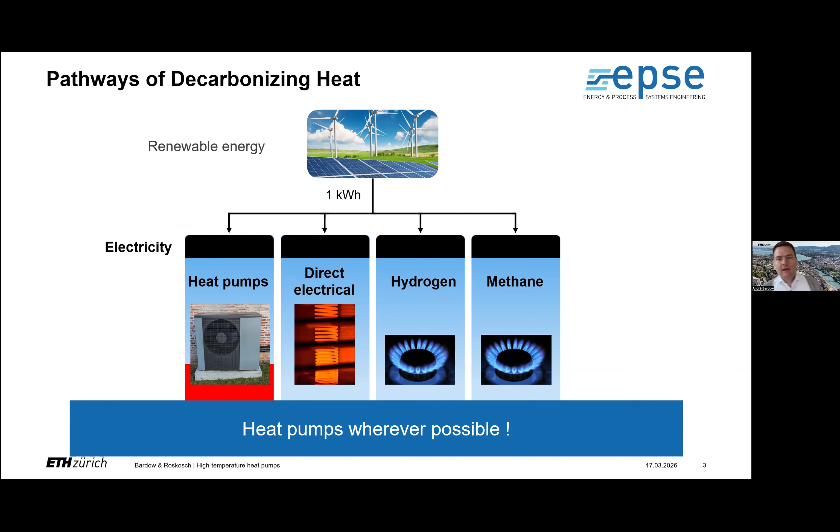And that's why we're pushing the boundaries. How are we standing with decarbonizing heating by heat pumps? For this, I looked at Swiss data, basically what's the energy demand in residential and industrial systems.

What you see at home, at least for Switzerland, which is cold today, a lot of our energy use is for heating - warm water, the shower you had this morning, and your heating system.

But also industry - actually the majority of energy for industry is used for heating. The catch is, so we know what to do to decarbonize this: prioritize heat pumps. If you look at homes, it's kind of awesome that in Switzerland and many other countries by now, heat pumps are the most sold heating source for private households. The market is established. There's still challenges out there, but it's kind of the go-to technology by now, which is awesome.

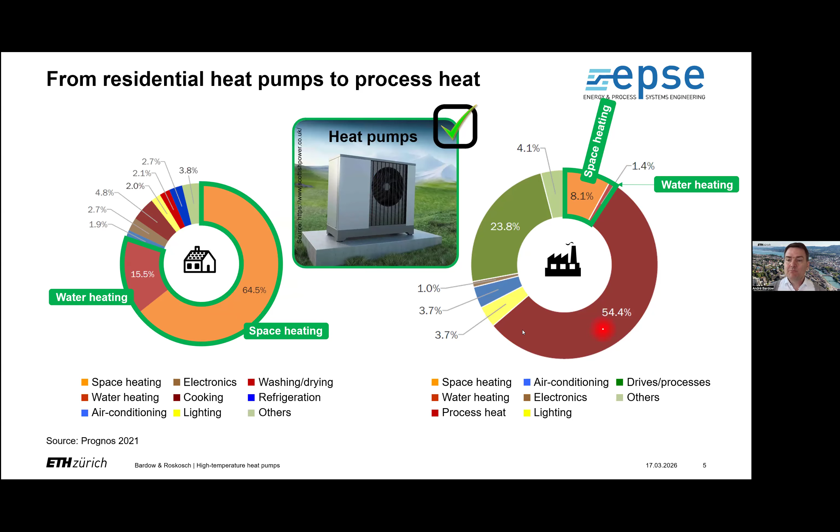The story is very, very different in industry. In industry, yes, we also have some space heating demand which we could supply by heat pumps, but most of what we are seeing is actually process heat - that means high temperature heat. And if you look at what we're doing today, it's basically 100% fossil-based, I would say. So the challenge I will be addressing in this talk is: how can we generate heat pumps that provide heat at higher temperatures to supply industries?

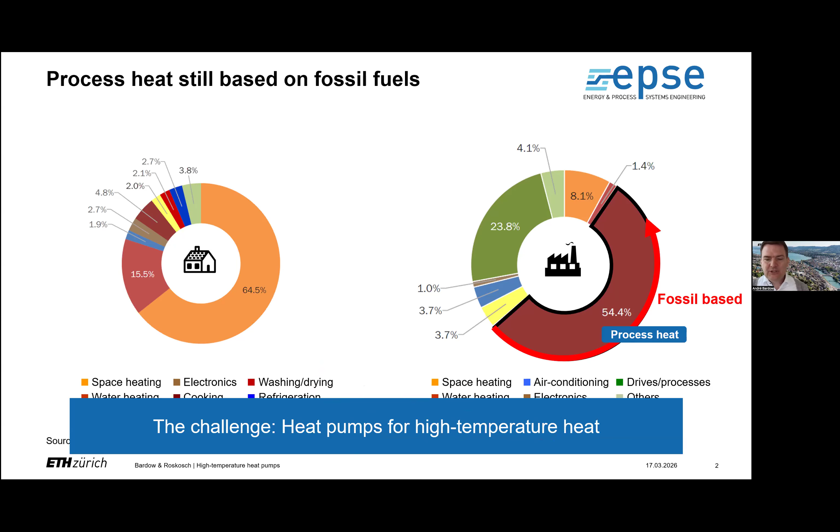Okay, so why is it so much more difficult? Why are we lacking heat pumps for industry? And for this, and because this is a webinar on thermodynamics, I have to show at least a stylized thermodynamic diagram where I plot temperature over enthalpy, like a simple diagram for heat for pinch analysis.

In residential systems, we have the advantage that all of us are individuals, but actually at home we are rather similar. We like our homes to be at 22 degrees, maybe somebody likes 25, but the heat demand is roughly at the same temperatures. And also the heat source - okay, maybe it differs by country - but when it's cold, not so much. So we have basically one fixed use case all across humankind.

So what we need is one type of heat pump that basically takes environmental heat, the heat source, and pumps it up to the heat demand. And for this, we have been very efficient at designing such cycles. For the non-thermodynamic experts - I think most of you should know - this is the vapor dome, the two-phase region, and we can design the cycle where we have compression, heating, and expansion, and the heat uptake in here. So we really optimize these systems.

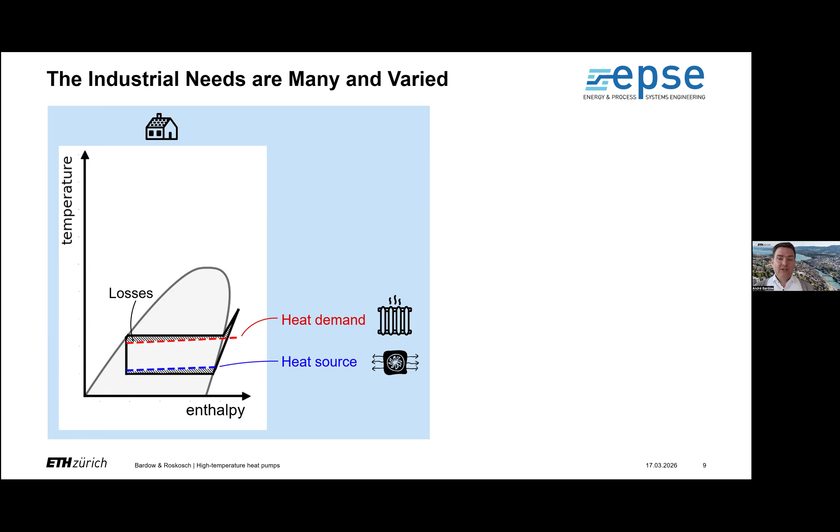That's awesome. Now, if you take a look at industry, the story changes completely. Why? Because the heat demands can be all over the place - they can be at very different temperature settings. You might want to boil some water at 100 degrees. Another company wants to heat up a gas to 200 centigrade. So it's very different temperature levels.

Also, what is going on is very different. You might want to generate steam at a certain temperature where the temperature doesn't change, or you take a cold gas and heat it up to feed it into your reactor. So it's both the temperature level and the temperature glides, as we call them - the temperature ranges are very, very different.

The same holds for the heat sources, where at home we are usually tied to the air, or maybe we drill into the ground, but it's environmental heat. Christoph was mentioning BASF is using some waste heat - they have it at 60 centigrade. Oh, maybe your company has something at 80. So we have very different use cases, both on the sink side and on the source side. And that is a challenge.

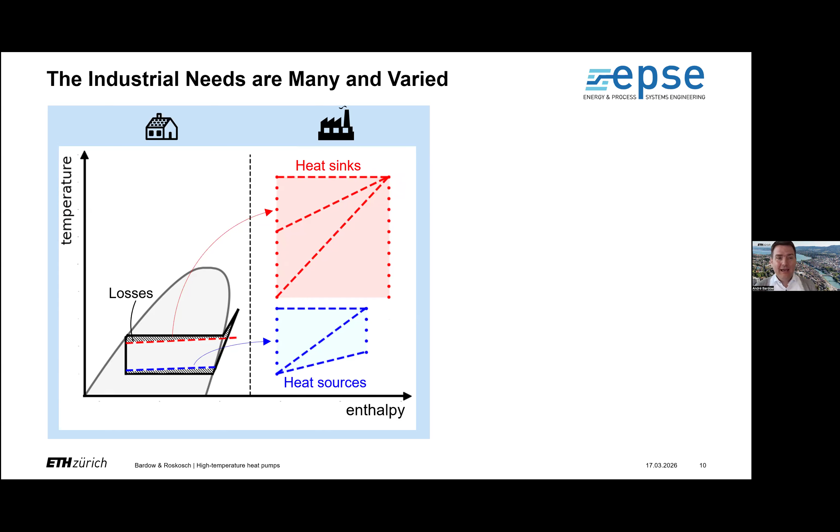How did we approach it by now? We design specialist heat pumps for every single application. So you will find heat pumps out there, but basically if you look at them carefully, you will figure that somebody had a use case where they needed steam at that temperature and had waste heat at that temperature, and so a heat pump was designed, and now somebody tries to sell it. So we have specialist heat pumps and also specialist refrigerants, that is the working fluids. And because of this, these are not mass product systems, but they are custom designed systems.

And that makes them very expensive. Or you misuse them because they were designed for a different case, you lose the efficiency, which is basically the losses are how tightly your cycle is connected to the heat source and sink.

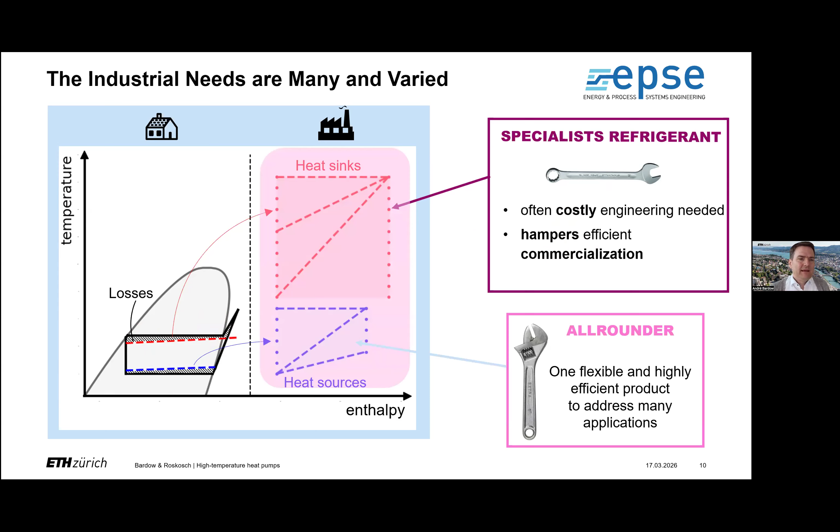So what we have been looking for in our group is to say, can we not find a heat pump that simultaneously covers all of these applications? Why would that be nice? Because then we can have one design and scale it out to all industry applications, generating economies of scale, at least of numbering up. And the key is to find the right refrigerant.

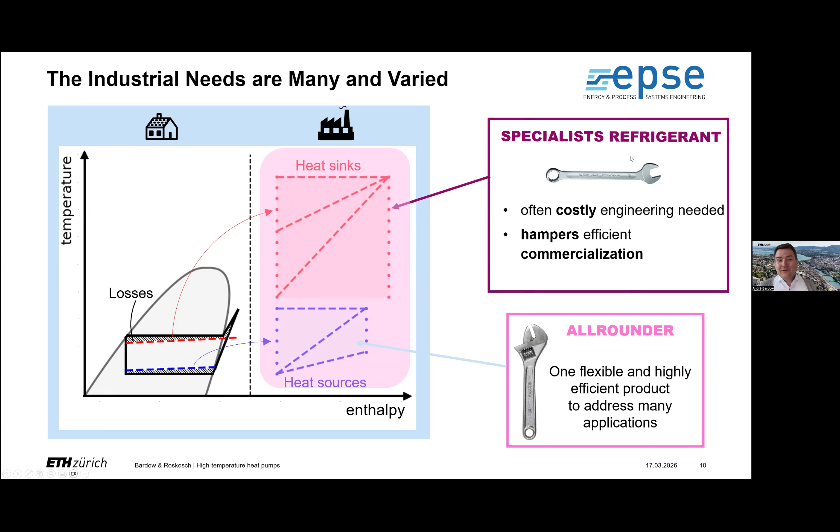And the refrigerant we are proposing is not a single refrigerant, but a refrigerant mixture. So instead of using a refrigerant A, you use a mixture of two components, A and B. The idea is we define a mixture A and B, and just by changing the composition, I can keep the same seals and materials in my company, but sell different mixtures to different people. I can customize the refrigerant and the heat pump, but still generate efficiencies.

So we started with this idea. We started a project saying, if we could exploit this flexibility in temperature level and in glide, what can we do? We can really make sure that we can tailor a heat pump to a specific industrial application.

But basically what will happen is that customer A will get a 10-90 mixture and customer B will get a 70-30 mixture. But still, because we limit to two molecules we need to deal with, we have one product platform, so that we can benefit from reductions in capital cost, and mass customize a slightly tweaked system.

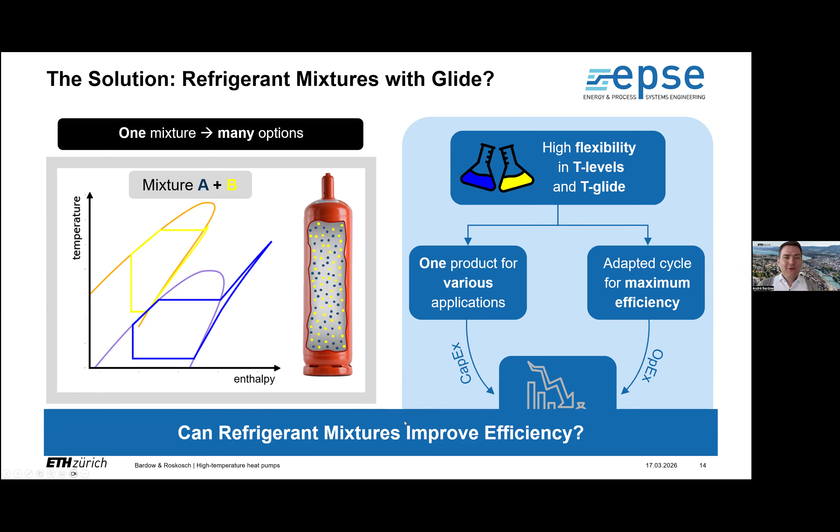The question is, does such a system exist? Because this is a nice animation, but do these refrigerant mixtures exist? For this, you need to know thermodynamics, because we don't want to try this out experimentally. I just want to highlight what Christoph was also referring to earlier. And if you are scared about thermodynamics, which has been traumatizing for many people, trust me, it's awesome, and it just got much better and more convenient to use.

And in particular, we've been benefiting a lot from AI, and this is a slide on what we've recently been doing. We've been employing machine learning, but I think the catch, like with thermodynamics, is that we really need to instruct the machine learning algorithms. We cannot use them blindly, but we need to instruct them to speak really the language of thermodynamics by implementing thermodynamic constraints. There are also some developments out there.

I just want to highlight one thing we did in our group. We have a version of PC-SAFT, which is an equation of state, and we have an SPT model based on structure - it's like GPT, ChatGPT. We can enter any molecule as text, as SMILES, and we can predict things like vapor pressure and mixture properties. And this works amazingly well.

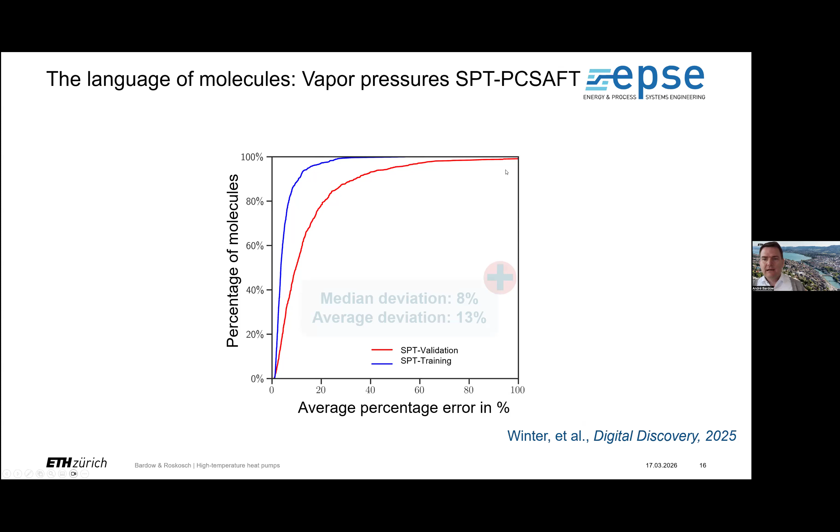So what you see is a large database of vapor pressures we predicted. This is a cumulative error curve. The blue line is basically if you fit PC-SAFT. The red line is what our predictions are - real predictions. We have errors around 10%, which might sound like a lot, but for some simple molecules, we are perfect. This is an average deviation, comparable to experimental deviations. Even for very complex structures, I think we get reasonable predictions with these tools.

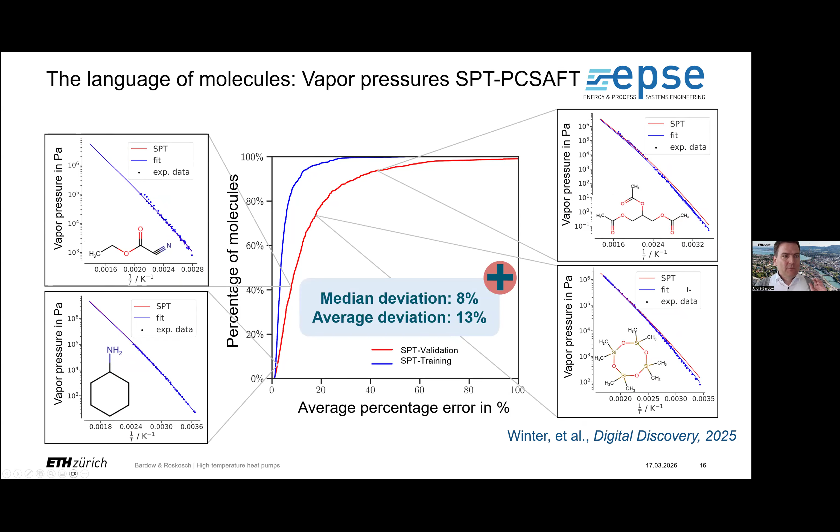So please overcome your trauma from your study time and really look at these amazing tools that are out in thermodynamics. A lot of people in the heat pump world believe RefProp is thermodynamics. Trust me, there's more to thermodynamics, and in particular if you want to go into the world of mixtures and so forth, you have to use these advanced methods.

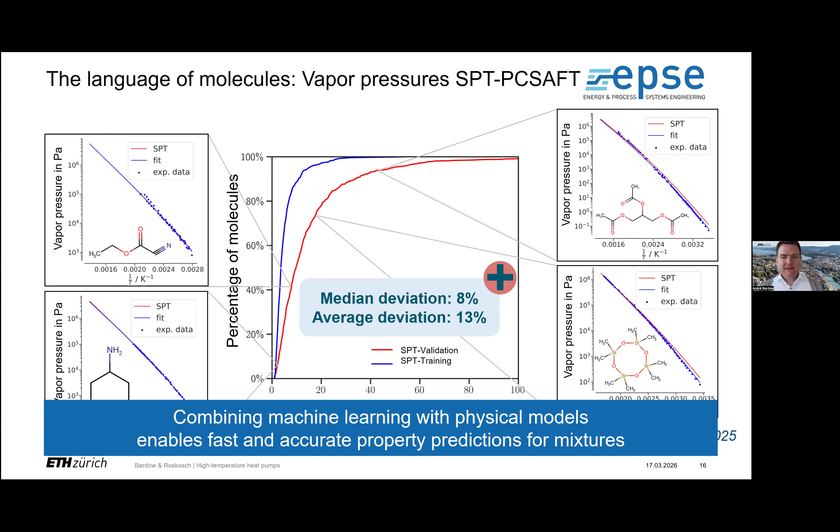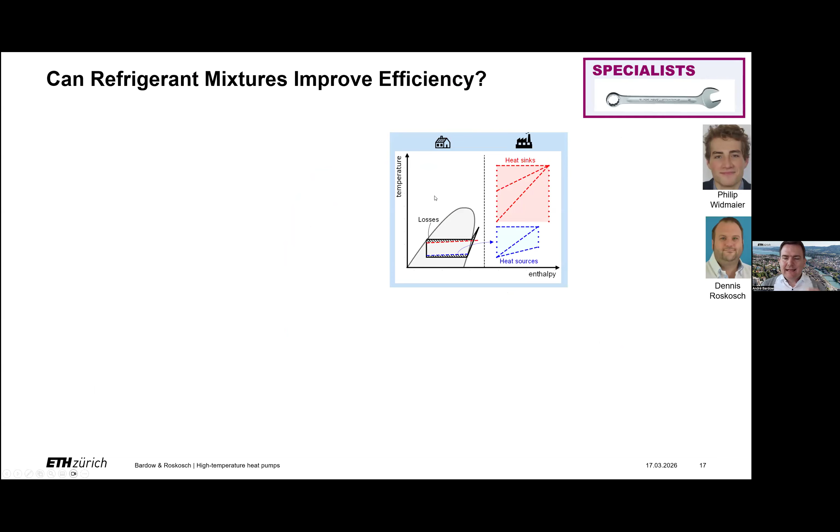So we use these kinds of tools in our group to answer the question: is it really a good idea to use these mixtures with a temperature glide? And this is what Philip Widmaier did. So what he basically analyzed is whether there's an advantage to using mixtures. And this is a complicated graph.

Basically what he varied is shown on the axes: he changed the glide, the temperature change we want at our heat sink—is it none or is it high? And on the x-axis you see the same thing for the heat source: do we have a constant heat source, or is there also a glide? And what we've plotted is the COP, the coefficient of performance.

Again, how much heat do I get per electricity put in, and we compare what the gain is for a mixture. What you see is this light color—anything green and yellow—means mixtures are better. Meaning if you have an application with this temperature change at the heat source and sink, you should use a mixture. The advantage can be 26%, which for industrial applications is a lot.

So what we see is this idea—which industry has been avoiding, using mixtures with a glide—would really benefit us, giving almost up to 25% efficiency gains. But okay, these are specialist mixtures. So for each point on this grid, we design the optimal mixture using thermodynamics.

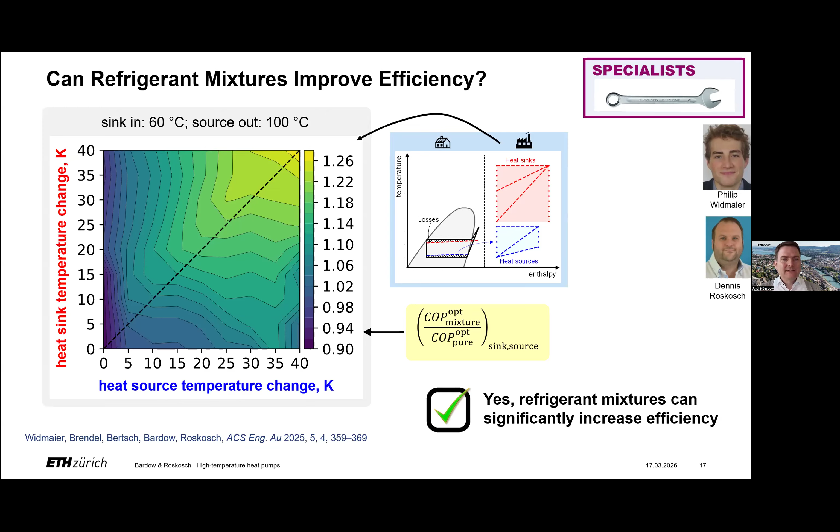Then the next question was: do these all-rounders exist, which we have been proposing? So basically, is there one mixture which I just need to tweak and it works in every single situation? And the news is, they do exist.

So the conclusion is that this concept we thought would be nice does exist. Yes, and in fact there are plenty of mixtures which could provide this flexible design platform for heat pumps while still retaining very, very high efficiencies.

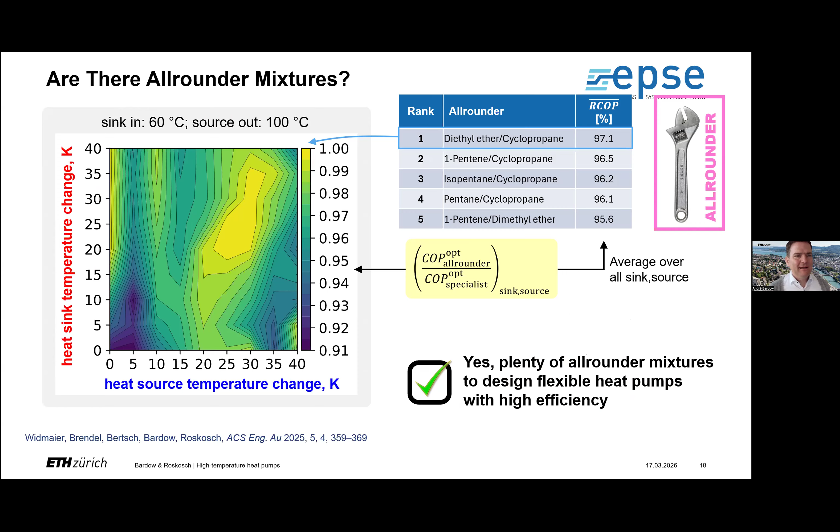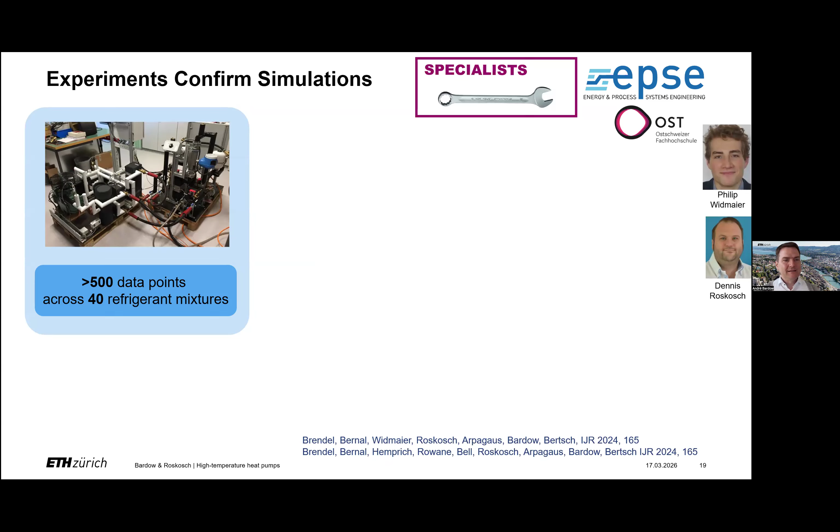Actually, I have to say the companies who provided, in particular, the compressor were scared, so we needed to sign that we waive any liability. But it worked like a charm. Now I can tell you the company is Bitzer, because they are super proud that there were no problems in the operations, and super proud because our colleagues generated a lot of data.

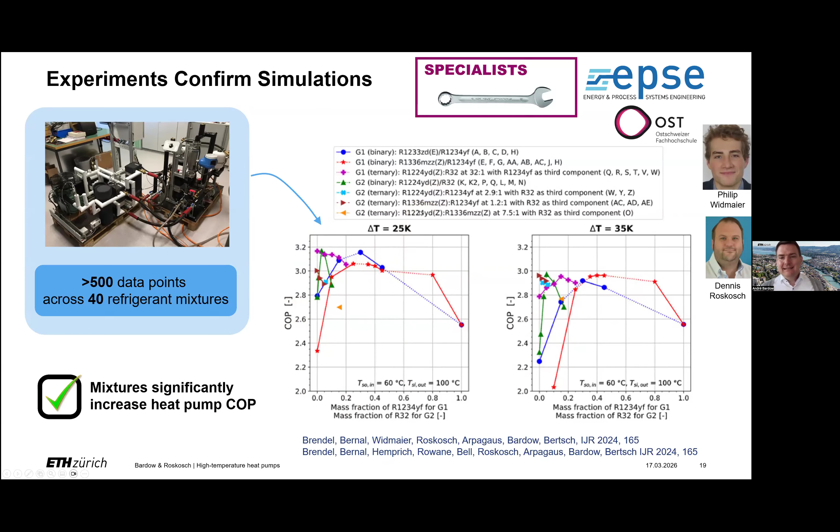So we confirmed the first finding: these specialists exist. And then what we found exciting was to analyze the data to see whether these all-rounders exist too. This is a similar plot, but be careful, it's COP again, now plotted against the 3 different combinations of heat sink and source temperatures we had. I know it's a little messy, but I'll just go through it.

This is basically the same mixture. By changing the composition of this mixture, we find the best performance. Obviously, we did not test all the molecules we could check in the computer, but this concept really seems to be working, that by tuning a 2-component refrigerant platform to your specific application, you can really get this benefit of COPs.

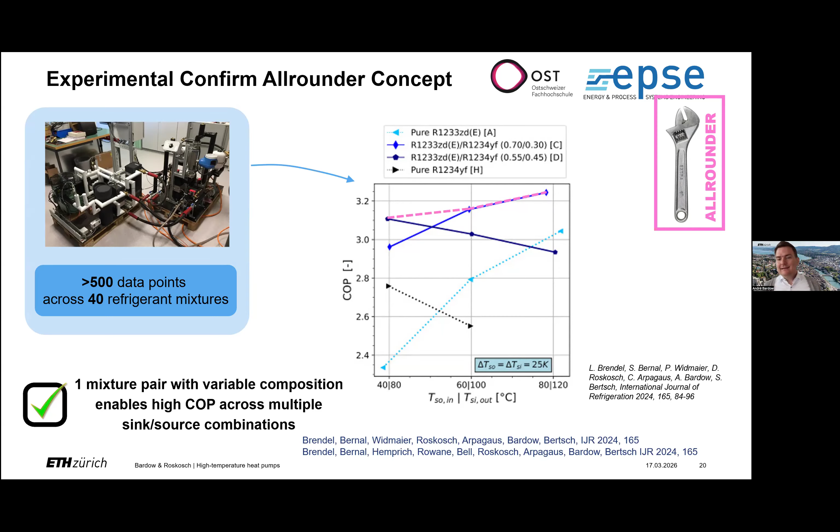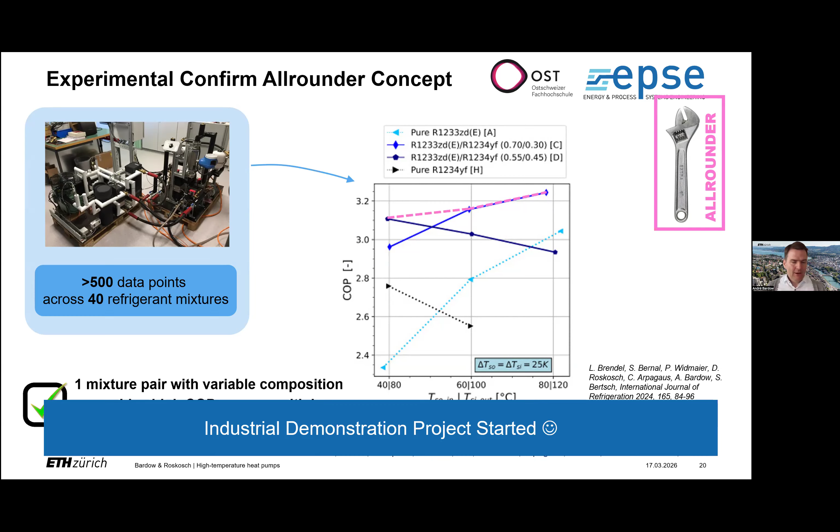And what I'm really excited about, I cannot fully disclose, is that this will now be industrially demonstrated. I'm not allowed to say the name of the company, but I love Switzerland, because we now have a company everybody of you knows that will build such a heat pump in their operation because they see the benefits of this and they've understood the heat pumps. Okay, now this is awesome. I'm very excited, as you might figure by now.

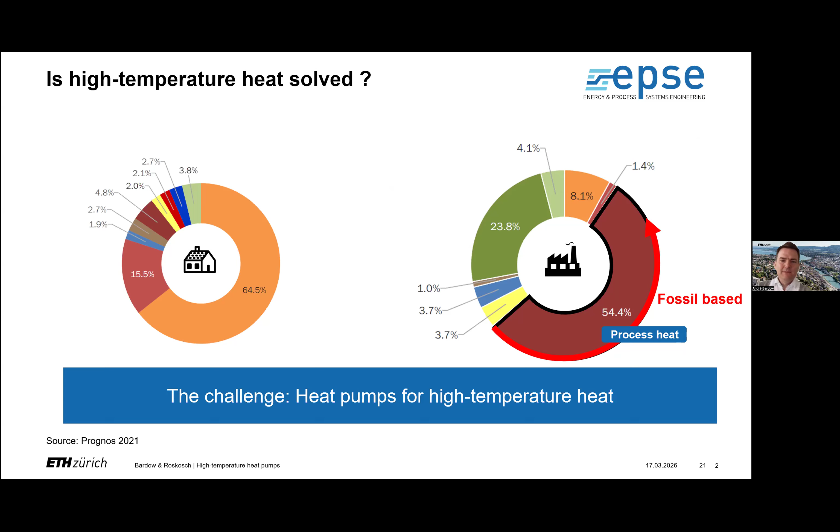So did I just solve high temperature heat pumps? Yeah, and for this, I need to be honest with you that I tricked you a little bit with our graphics. What do I mean by this? I plotted this big space of heat pump applications and showed you that in most of the space, we are green or yellow, meaning the mixture heat pumps are awesome. But there are some blue regions where they are not that awesome.

And let's look at cases where they are not that awesome. This is the cases where we don't have a temperature glide in heat source and heat sinks. And if you think about this, what kind of applications are we talking? One application is generating steam. If I generate steam at 200 centigrade, it's boiling water to steam, the temperature does not change. So while this space looks maybe small, I have to be honest with you, actually, half of the industrial applications are this class of applications.

So what I showed you till now is awesome if you have glides where the temperature is changing, but for steam, actually, this is not the solution. So we have to look for, and I think it's really important to separate these 2 cases, another class of solutions. And for this aspect of steam generating heat pumps, I want to emphasize another point which is important.

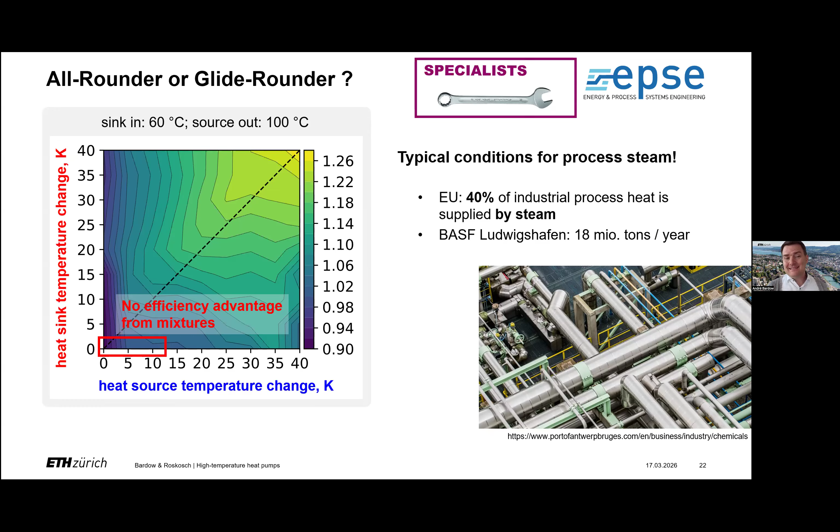Because it's not enough to design a heat pump, in particular in industry, because actually a company like BASF buys a heat pump, but it has a lot of boilers. It has a waste stream. You really have to have a heat pump that needs to fit into the energy system. And it's actually more complex than a usual boiler, because with a boiler, I just take my fossil fuel and burn it. But with a heat pump, I need to make sure that the waste heat is available and the temperature levels are well aligned, because I'm not burning something to 2000 centigrade, but every Kelvin matters.

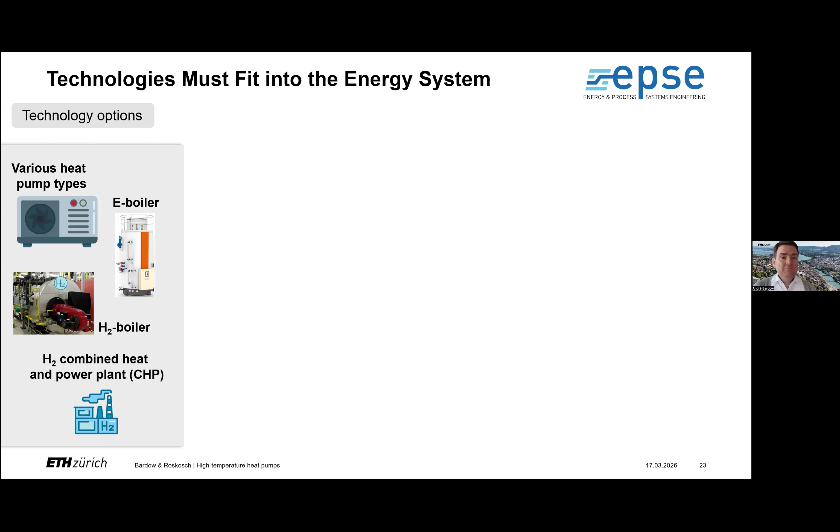So it's really about whether the heat pump fits into your overall energy system. A standalone analysis of your heat pump is insufficient. So what we did in order to analyze the role of heat pumps and which heat pumps we need to generate steam, we looked at a whole chemical site. And this has been published.

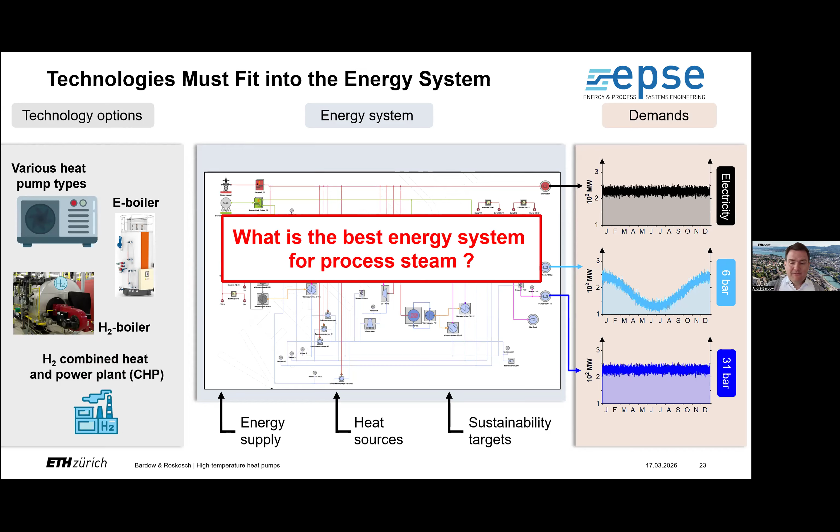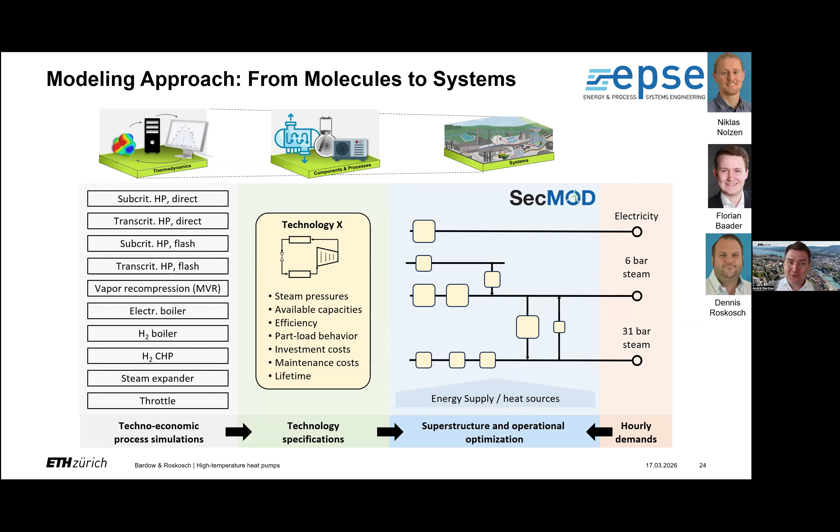We did a very detailed analysis. I cannot show all the details, but we developed a model. We analyzed many scenarios and very different conditions, but I will just share the base result finding, because they actually turn out to be very stable. I'm happy to discuss with you. So we analyzed the system: what's the optimal net zero greenhouse gas emission supply system? And it looks like this.

I apologize, it's a little bit complicated, but if you look at the left-hand side, you see heat pumps, but there's also a lot of other stuff: electric boilers, even hydrogen boilers. And if you look at the nominal design, the capacities we are designing, basically we cover like half of the capacity with heat pumps and the rest is covered with something else, okay?

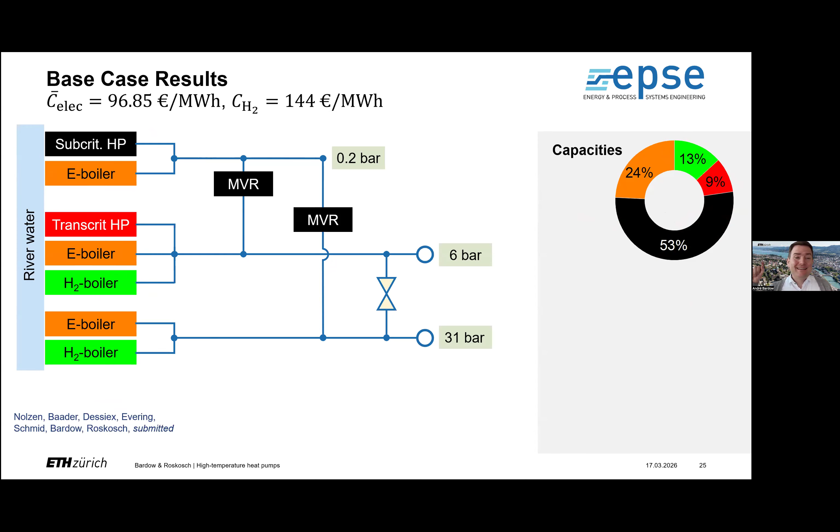So I don't want to oversize my heat pump, the same as you do at your home. You have a storage or maybe an electric heater to cover this one really crazy cold day per year, and then you just heat by electricity. The same thing is happening here. This one crazy day, I will not oversize my heat pumps. So heat pumps again, it holds even on the systems level, what I told you: heat pumps have the priority, even looking at it economically.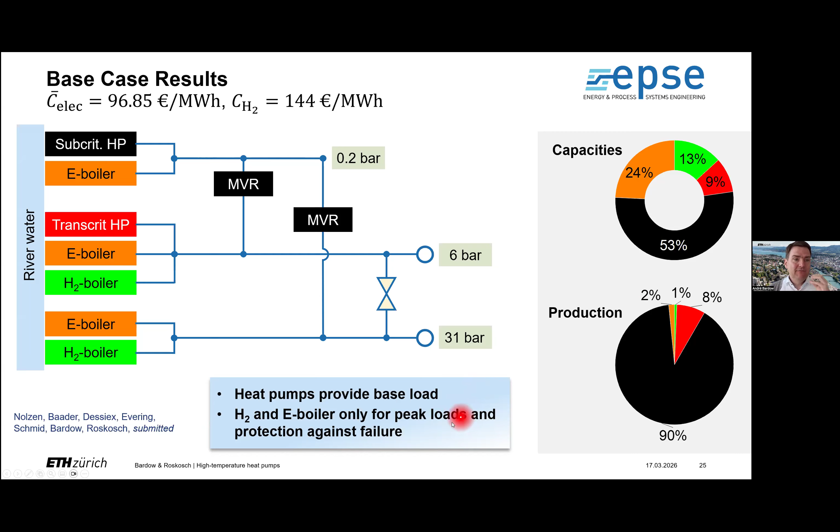And what kind of heat pumps are these? Now I take a zoom into the technology, because this is the heat pump we find, and it's a little bit complicated. So what we find is actually a low temperature heat pump. So to produce high temperature steam, we use a low temperature heat pump. We generate low temperature steam and then do vapor recompression. So the conclusion is, and this finding is quite robust, that the best high temperature heat pump for steam generation turns out to be a low temperature heat pump. And still this is important, because the heat pump does most of the lifting, since you evaporate the water, which is a lot of the energy input.

But why do we prefer a low temperature heat pump? Because we find much more efficient refrigerants, and we can operate the heat pump really at its sweet spot, so maximum COP. And then we do basically this uplifting with the compression, and we solve two problems. At these high temperatures, we find very few refrigerants which would even just work. And what is nice, this technology could be feasible today.

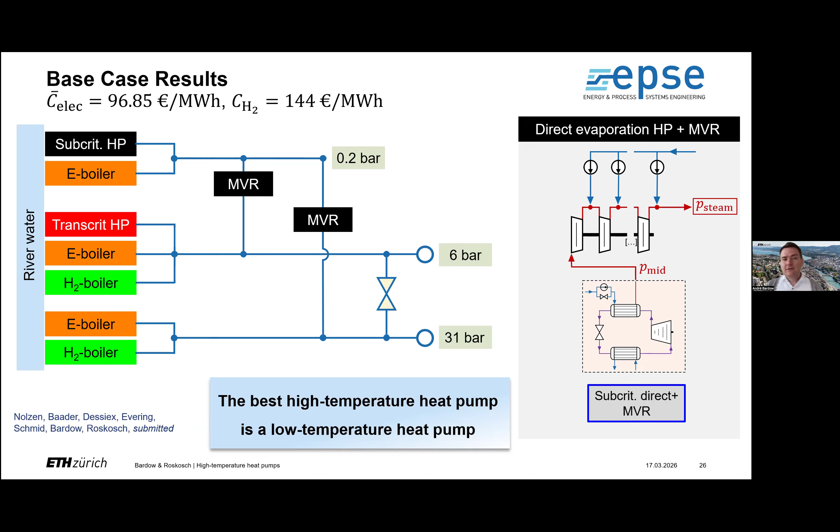Okay, so with this I hope I covered the whole space, and I just want to conclude. I hope I could show you that this idea to use mixtures with a temperature glide is really a promising concept to supply applications where we do have temperature glides, whereas for steam, and also high temperature steam, it's actually best supplied by low temperature heat pumps plus vapor recompression. And I just have to emphasize, money makes the world go round, but if you take a step back, you will find that thermodynamics is really the guiding star that takes us to such analysis. With this, I thank you for your attention, and I'm happy to answer any questions.

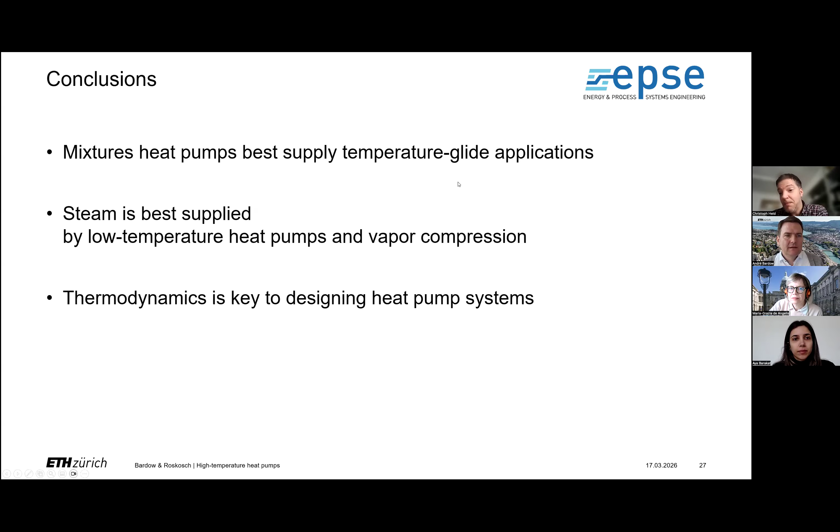The first is, the heat pumps that are implemented in industry, are they meeting ATEX standard? Oh yeah, it's for industry actually, we put... industry is much easier, I think, than at home. That's basically the application. Actually we put this in our design optimization, we want to implement these constraints, but industry people kind of told us, don't worry too much.

Similar to this, there's a similar question: could you think of, or maybe you have already done it, to take also into account other criteria, like for example toxicity, flammability, stability, things like these? No, it's... so yeah, I've been very thermodynamic, I only showed you COP.

So maybe let's take the natural next step, which would be at least money, CapEx, combining basically thermodynamics telling me about operating costs. We didn't look at CapEx. And if you think a little bit about CapEx, the trade-off is always that making the cycle more efficient means smaller temperature differences, meaning larger heat exchangers. So there is a trade-off, but I don't show this today. Money-wise, we also see this advantage for heat pumps, it's a smaller number. As a rule of thumb, maybe half the numbers I showed you today is what you lose in economics.

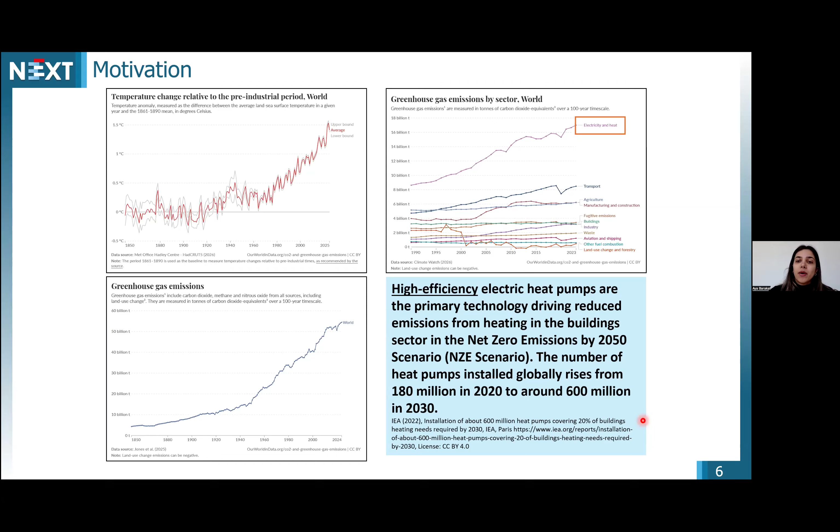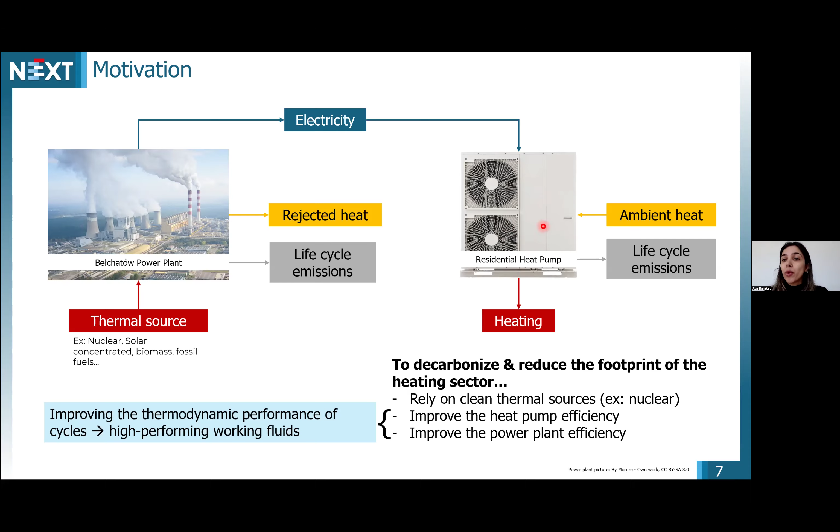Away from just replacing the heating technology with a heat pump, in order to truly decarbonize the heating sector and reduce its footprint, we need to rely on clean thermal sources and improve the efficiency of both the power plant and the heat pump. This way we achieve real decarbonization and reduction in footprint. The improvement of thermodynamic cycle performance can be achieved by using high efficiency working fluids, which is the topic of today.

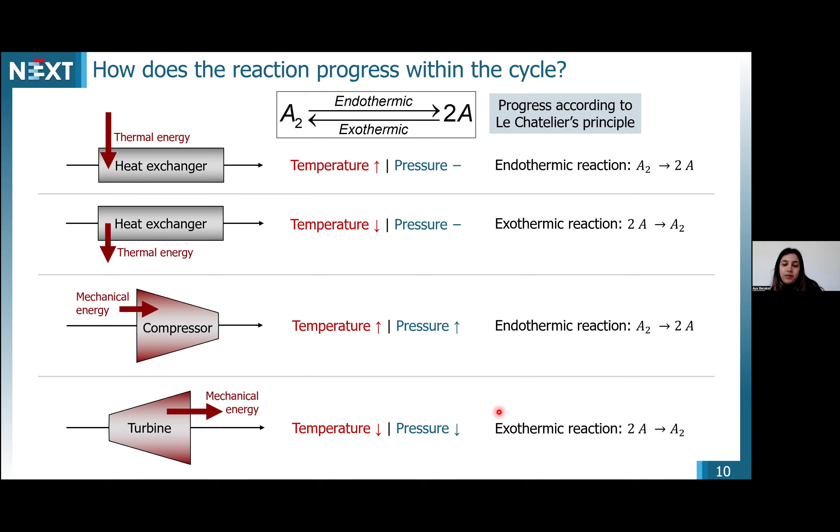So why reactive working fluids? In this slide, I'm going to explain the initial motivation behind using reactive working fluids.

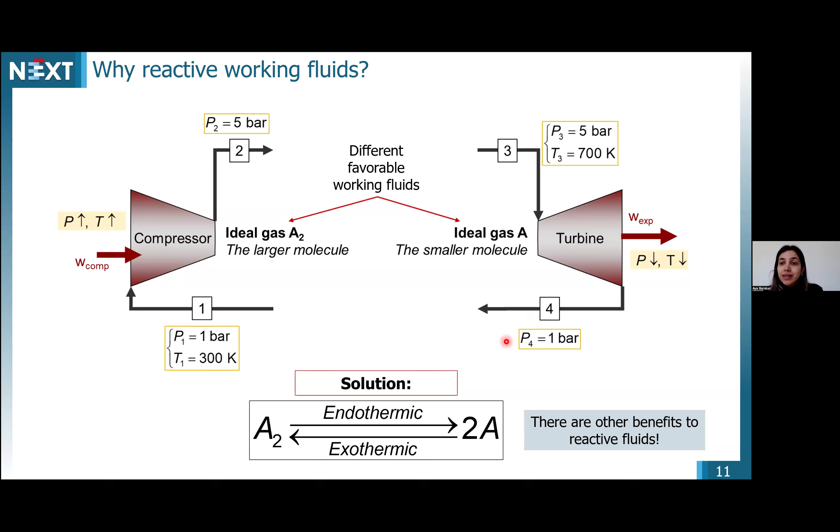Usually in current power plants it is impossible to compress one fluid and expand another in a single thermodynamic cycle. However, if your fluid is reactive, with a chemical reaction inside that takes you from A2 to A spontaneously, then this is definitely possible with reactive working fluids.

The first kind of results are part of the study done during my PhD on a heat pump based on the ideal reverse Brayton cycle. This is a heat pump totally in the gas phase—that's why we have a turbine here and not a valve, as you're used to seeing. We put a reactive fluid inside, and there's a heat source and a heat sink as well.

We can see how the chemical reaction takes place inside the heat pump. In the compressor the reaction is endothermic, and in the heat exchanger where the fluid rejects heat, you have an exothermic reaction. In the turbine you have an exothermic reaction as well, and in the heat exchanger where you absorb heat from the heat source, you have an endothermic reaction.

What does this mean? In the compressor, the reaction acts as an internal cooling mechanism for the fluid, absorbing heat and cooling it down. This is really favorable for compression because it decreases the compression work. So other than the compositional effect of going from A to A2, we have other thermal effects that are beneficial when using reactive working fluids.

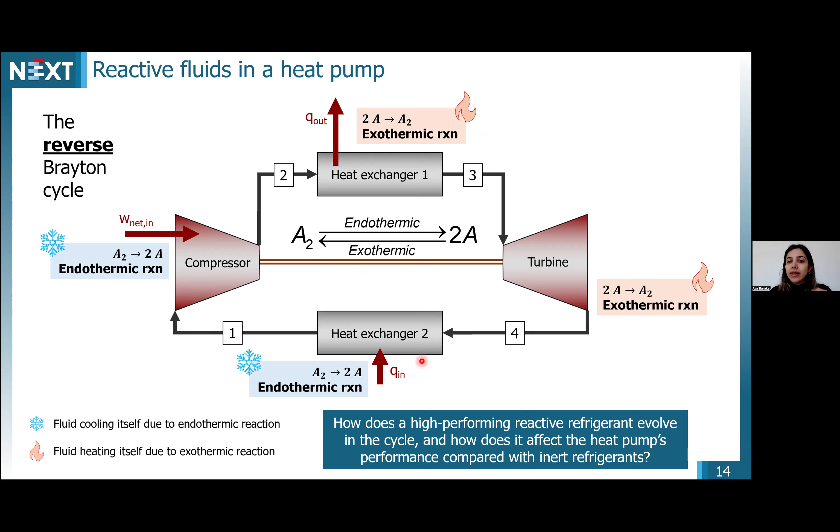In the turbine, we have an exothermic reaction, so the reaction acts as an internal heat source, heating up the fluid throughout expansion. In the heat exchanger where the fluid rejects heat to the sink, you have an exothermic reaction—the reaction releases heat, but also the fluid's temperature is decreasing, so it releases heat because of the temperature decrease as well. So you have two modes of heat exchange with the heat sink. The same happens on the heat source side, where the reaction absorbs heat and the fluid absorbs heat in the form of increasing its temperature.

Now, for the sake of presenting some results, we take a simple example. The heat source is at a constant temperature of 10 degrees Celsius, and the heat sink is at a constant temperature of 50 degrees Celsius. These temperatures can be representative of a residential heating application. We use 1 bar and 5 bars as the cycle pressures, since we're using the ideal gas assumption, so we pick reasonable pressures. For the heat exchangers, the pinch point temperature difference is 5, and from this we can calculate the temperature at points 1 and 3, which are the inlet of the compressor and the turbine.

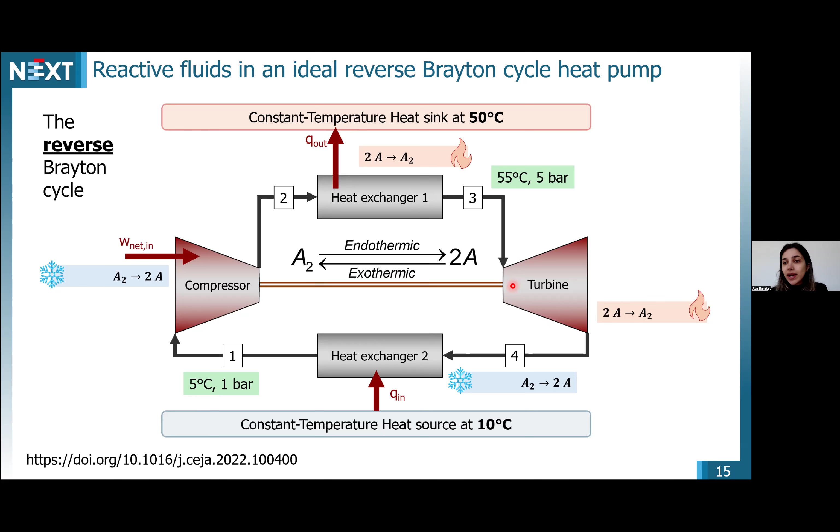Now, what is the thermodynamic model? As I previously mentioned, it is based on the ideal gas law. So we model the system as a mixture of A and A2, and the composition of this mixture at any TP set is dictated by chemical equilibrium.

Here you can see the equation to calculate the chemical equilibrium, and you can express it in terms of partial pressures, and not fugacities, because it's an ideal gas. At equilibrium, the constant can be calculated as a function of the standard entropy change of reaction and the standard enthalpy change of reaction.

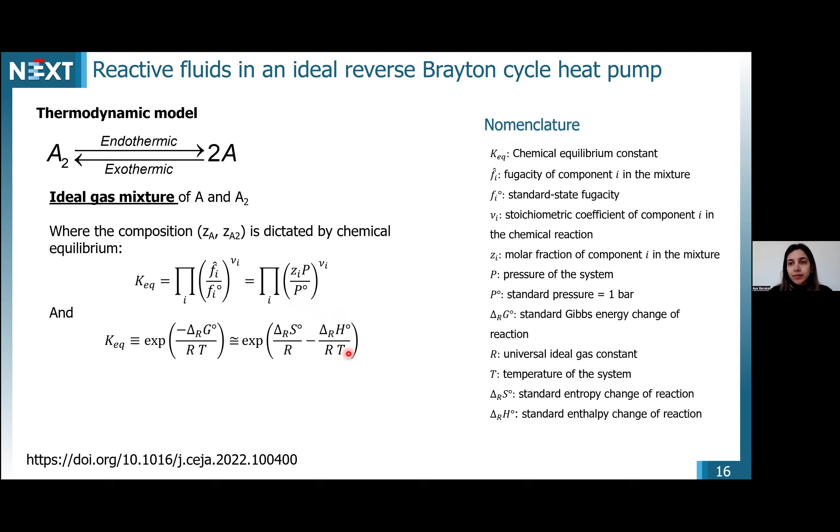What about the molecules that we consider in this kind of calculation? We have A and we have A2, but what are A and A2 in this case? We take A to be a monoatomic gas, which is fictive and theoretical, and A2 is a diatomic gas, which is also theoretical. The following are the properties of these molecules.

Molar mass of A is taken at 1, and A2 is 2 grams per mole. The Cp and Cv molar are calculated using the energy equipartition theorem. They are constant, independent of temperature. The initial number of moles of A2 is 1 mole, while that of A is 0. The stoichiometric coefficient can be concluded or deduced from the chemical reaction here.

Now, instead of fixing one and studying one fluid, we decided to study a wide range of working fluids, and each one of these fluids in the range is characterized by a unique set of the entropy change of reaction and the standard enthalpy change of reaction. So the properties of A and A2 molecules are the same in terms of molar mass, Cp, and the initial number of moles, but each fluid is characterized by a unique set of the entropy change of reaction and enthalpy change of reaction.

For this application, we consider the ranges of 0 to 0.2 kilojoules per mole Kelvin for the entropy, and 0 to 200 kilojoules per mole for the enthalpy. Now, what do these parameters affect? They affect the chemical equilibrium constant, so the composition, and also they affect the reference state properties, which can be calculated based on this kind of equations.

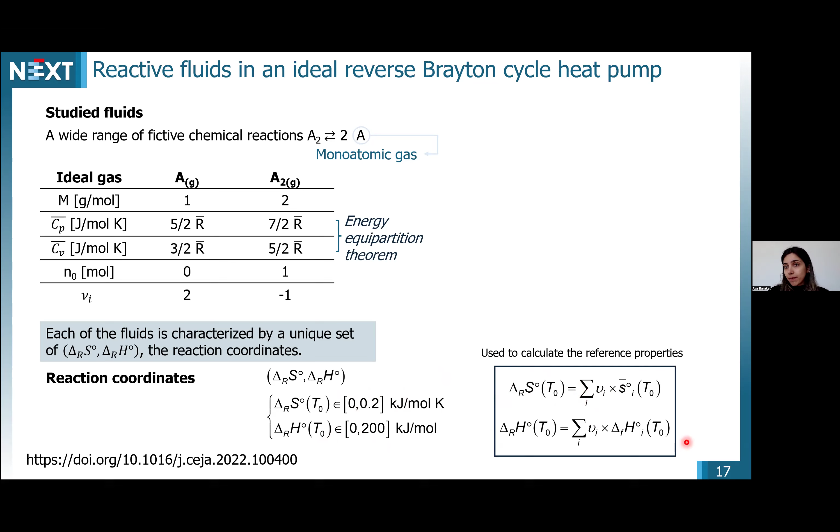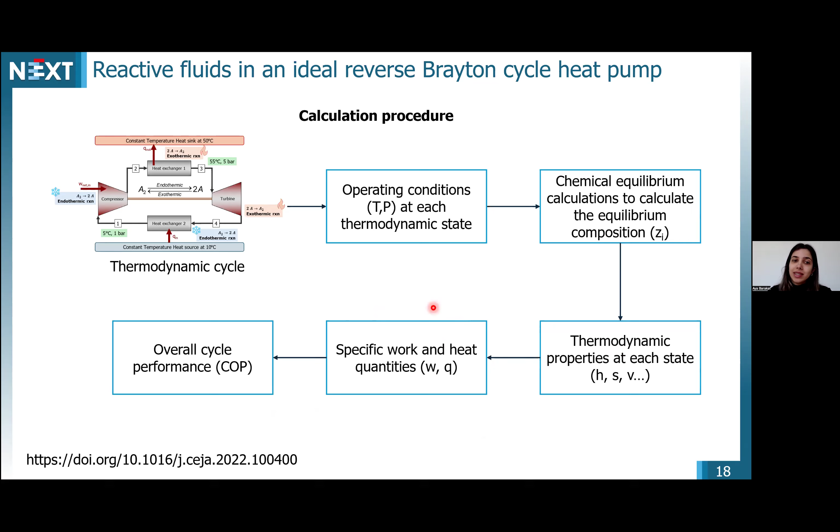So the calculation procedure is that we have our thermodynamic cycle with the input given. For each TP condition inside the cycle, so 1, 2, 3, 4, we calculate the composition using chemical equilibrium calculations. Then, when we have the composition as well as T and P, we can calculate the total thermodynamic properties, in this case the ideal gas mixture thermodynamic properties, such as enthalpy and entropy, and we can calculate the specific work and heat quantities and the coefficient of performance.

Now, before I show you the results, I'm just going to show you how the results will be presented in this format. You will see color maps in the following slides. On the x-axis, you have delta RS, which is the entropy change of reaction, and on the y-axis you will have the standard enthalpy change of reaction, which means each point in the color map is a unique working fluid in our case.

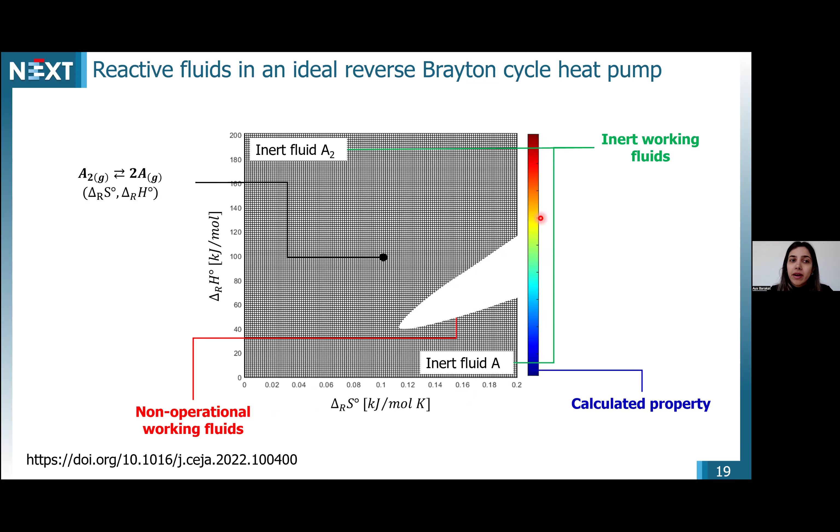On the top left and bottom right corners of the color map, you can see inert fluid A2, so this is pure dimer, and pure monomer on the bottom right. Why do we get these pure dimer and pure monomer? Because for these fluids, the chemical equilibrium constant is either too low or too high, so the reaction basically doesn't take place. You will also see a blank space in the color map, and this blank space presents the fluids which are not suitable for the heat pump application, because if we do the calculation, we will find a power cycle and not a heat pump, and this is probably due to the pressure values selected, as they are fixed. On the color bar, you will see the calculated property.

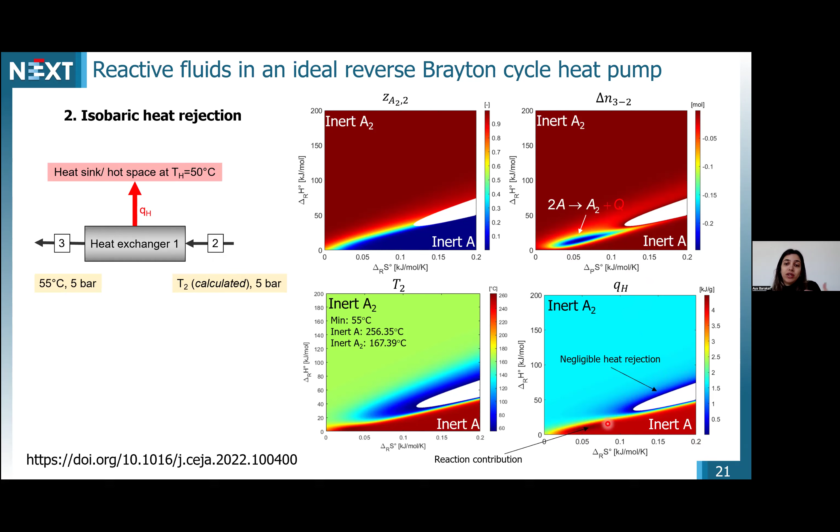We can calculate the specific heat rejected to the heat sink, per kilogram or gram. You can see that for fluids where T2 is not high due to the endothermic reaction in the compressor, you don't reject as much heat as A2 or inert A. But this doesn't mean the reaction itself penalizes heat rejection, because if you look at the delta N plots, the reaction, when it takes place, actually increases the heat rejection to the sink, providing more. Now in the turbine, we can do the same kind of analysis.

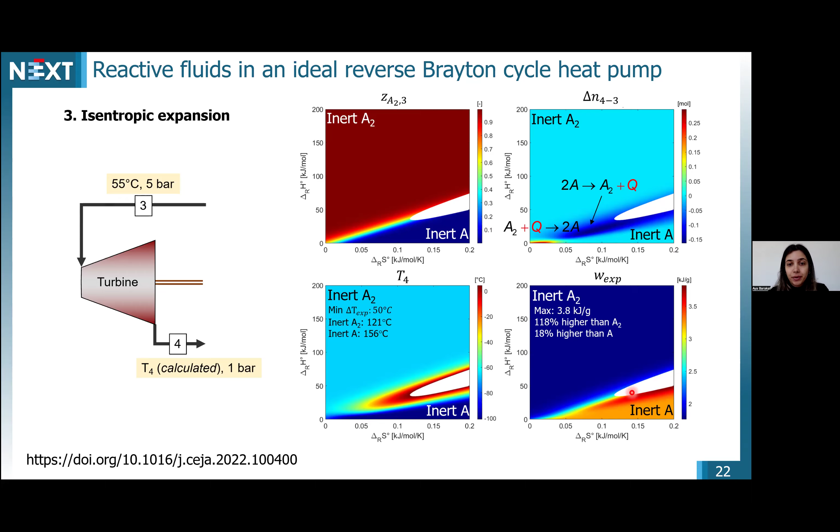Now, what happens to the overall coefficient of performance of the cycle? I plotted the coefficient of performance and the second law efficiency, and you can see that reactive fluids achieve extremely higher coefficients of performance compared to A2 at 2.7 and A at 2.1. However, if we look back at the specific heat supply map, it is not as good as A and A2. So there's a trade-off between the heat supplied per mass and the coefficient of performance of reactive fluids based on this study.

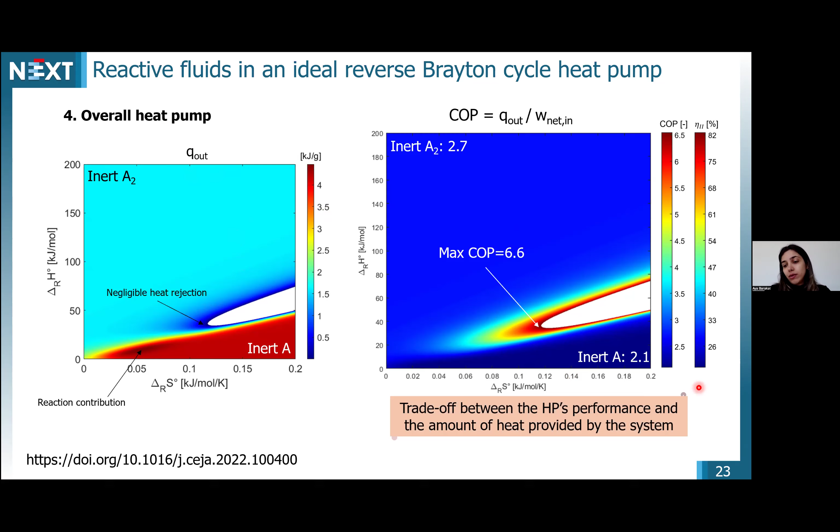One way to see how an inert heat pump compares to a reactive heat pump is by calculating the mass flow rate required for the reactive heat pump to supply the same thermal power output in kilowatts as A2, the better performing inert fluid. Here, on the x-axis, you see the coefficient of performance of the reactive fluid compared to A2, and on the other axis, the mass flow rate needed compared to A2. Each point in the scatter plot is a different fluid.

The blue region shows all the fluids that give at least a 10% increase in coefficient of performance, where you'd need to increase the mass flow rate by a factor of 10 or less compared to A2. The lower boundary of this region gives the lowest factor you need to multiply your mass flow rate by to obtain this increase in coefficient of performance versus A2. But it shows that you can get double the coefficient of performance by multiplying the mass flow rate by less than a factor of 2.

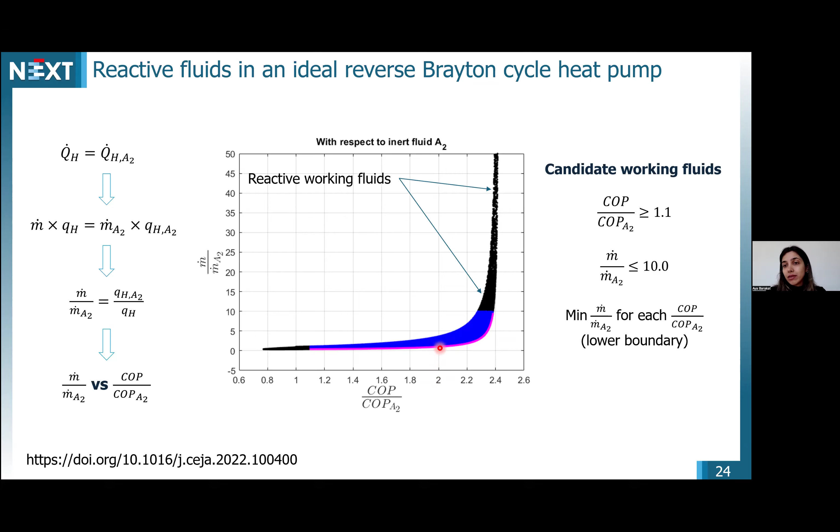Here I present the temperature entropy diagrams of the heat pump cycle. In the middle, there's a high-performing reactive working fluid. On the left, inert A2, which is pure, no reaction. On the right, inert A, also pure, no reaction. The isobar shapes are different because of the chemical reaction and composition change. But also you can see how the heat pump is more efficient because it is approaching the Carnot heat pump, which is a square on the TS diagram.

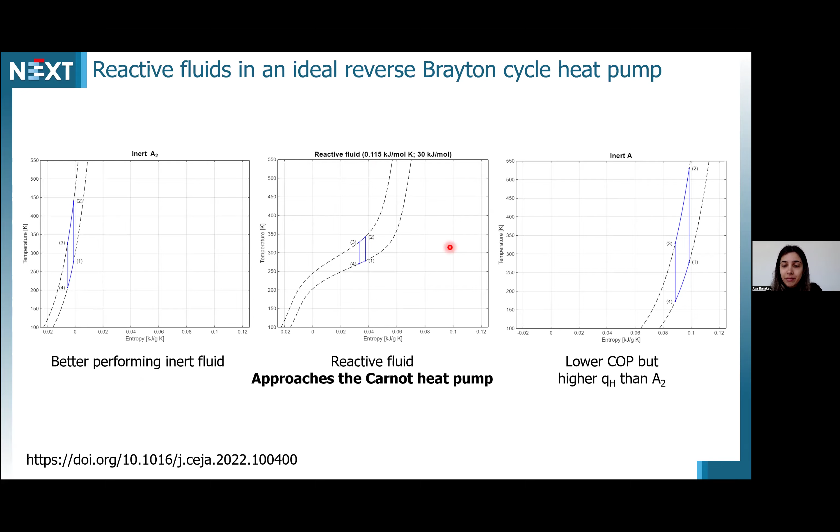So now I'm going to present briefly the results on a real vapor compression cycle. Now the application is not low temperature, but high temperature. And for that, of course, you can see the valve as an expansion device. The temperature of the heat source is at 80 degrees Celsius constant, and the temperature of the heat sink is at 130 degrees Celsius.

The pinch point of the two heat exchangers is taken to be 10, and the pressures in the cycle this time are not fixed, they are optimized or selected to optimize the coefficient of performance. The pressure drops are neglected because now we're comparing two different fluids, and the compressor isentropic efficiency is taken into account.

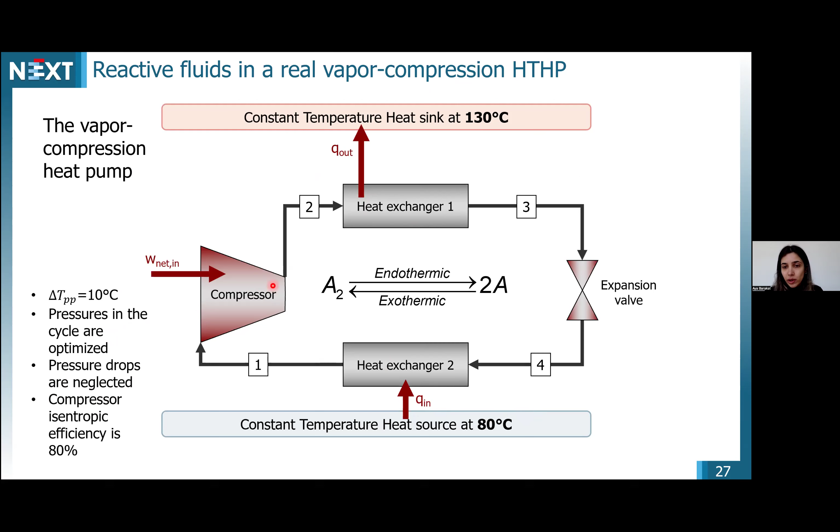So what is the thermodynamic model in this case? The fluid is modeled as a mixture of the dimer and monomer using the Peng-Robinson equation of state, but also using the chemical equilibrium to determine the composition of the fluid. The fugacities come from the equation of state in this case. You can learn more about the thermodynamic methodology by visiting the following articles that I'm attaching here.

So the fluids that we are going to compare are reactive N2O4, which I already spoke about in the intro, versus water, which is now considered the state of the art for a high temperature heat pump, or the best fluid that's available, safe, and cheap.

Okay, so here I present the temperature entropy diagrams of water on one hand, and N2O4 reactive on the other hand. We can see already a few differences. For water, you have the minimum pressure at 0.3 bar, which is a subatmospheric pressure. It induces problems with the heat exchanger design on the heat source side, and the compressor also, because the specific volume of the fluid will be large because of this low pressure.

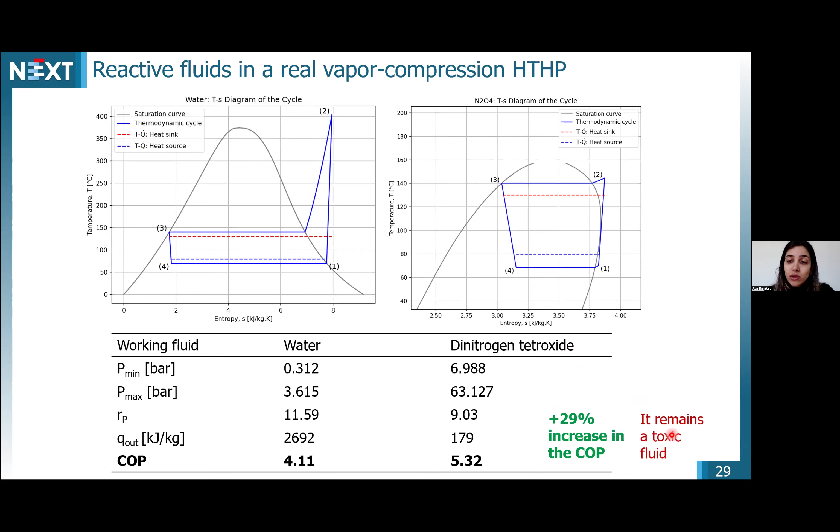So in conclusion, we can see that reactive fluids offer significant potential to increase the thermodynamic performance of heat pumps compared to inert refrigerants. That is because of both compositional and thermal effects of the reaction inside the cycle, which happens spontaneously, ideally without external stimuli. And there remains a need to find other reactive fluids that offer high performance like N2O4, but are safe and environmentally compatible.

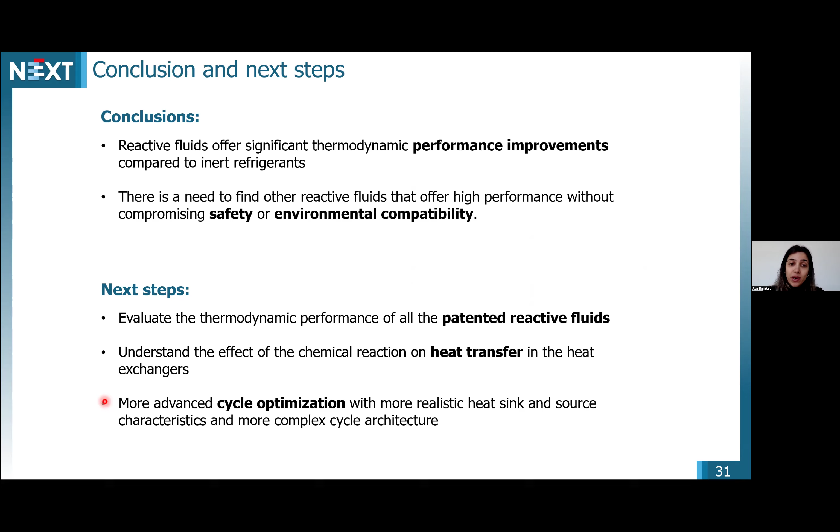So the next steps at NEXT and LRGP are to evaluate the thermodynamic performance of all the patented fluids that I talked about, and to understand the effect of the chemical reaction on the heat transfer in the heat exchangers, because this is really important, and how it affects the sizing of the heat exchangers as well. And of course, to conduct a more advanced cycle optimization with temperature glides of the heat sink and source, and more complex cycle architecture with intercooling, for example. This is already a work in progress.

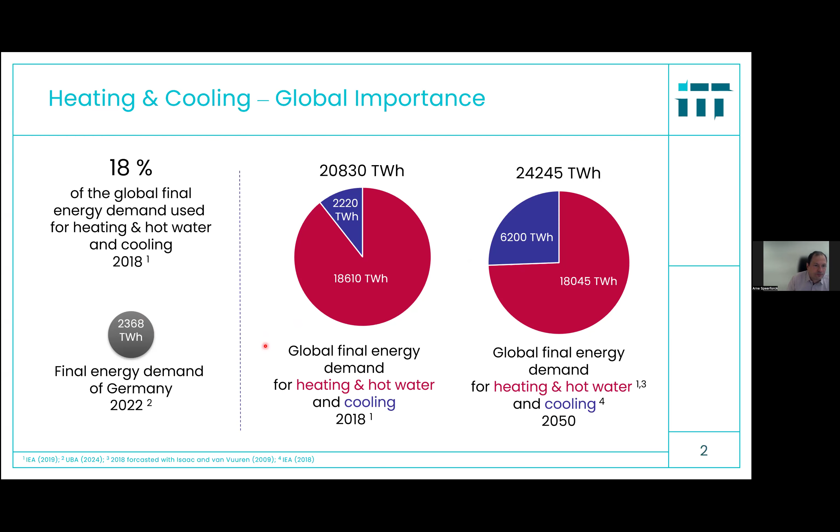Now, before I tend to focus more on the technology, I also want to talk a little bit about the status and the market. Obviously, heat pumps are an obvious solution for the energy transition.

When I was working in industry, around this area, I was heading the pre-development technology department for heat pumps, and in this area you could feel that it was kind of a Me Too product—you would manufacture it, but the big boom was still to come. Then, years later, you could actually see this boom.

In the market, these are the units sold in Europe added up—3 million, the largest one. You can see that now in recent years it went down a little bit, maybe associated with discussions going on in Germany.

What I always find interesting is if you look at the type of heat pumps—this blue one is air-water, air heat pumps. Ground source heat pumps are just this small green area. So even though from a thermodynamics perspective, ground source heat pumps make a lot of sense, they play a smaller role in the markets.

If you then look at the main challenges for household appliances, it was mainly at that time the F-gas regulation—a phase-out of fluorinated gases, refrigerants with a high global warming potential. As this happens, as the amount was reduced from 93 to 63%, it really shook up all the manufacturers because the price for the common refrigerant R410A went up a lot.

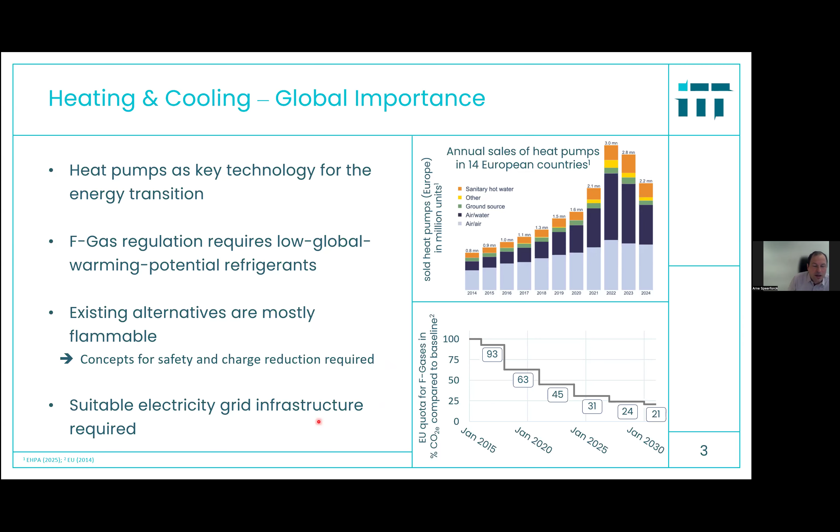Let us now first start and talk a little bit about the refrigerant for household appliances. There's a very still read-worthy paper, even though it's some years ago, by Calm from 2008. He separated the refrigerants used into 4 generations. The first generation was whatever worked—there you were not competing with other technology than ice boxes, and you were using whatever worked as a refrigerant.

And interestingly, in this area, propane was also a refrigerant of choice because it was available. You can see this advertisement of a company made in 1922 by the Car Lighting and Power Company—they marketed propane as the odorless safety refrigerant. As you can see here, it is neither deleterious nor obnoxious and the engineer can work in its vapor without inconvenience. So at this time, the look on propane was more from that side.

Other refrigerants were also used, like sulfur dioxide, heavily toxic, so this required a change. There's a citation that if the refrigeration industry would try to go anywhere, they would need a new refrigerant. The focus after that area was more on safety and durability. The way people screened refrigerants was by looking for a normal boiling point—not as sophisticated as today—between minus 40 degrees C and 0 degrees C, and looked for it to be safe and non-toxic.

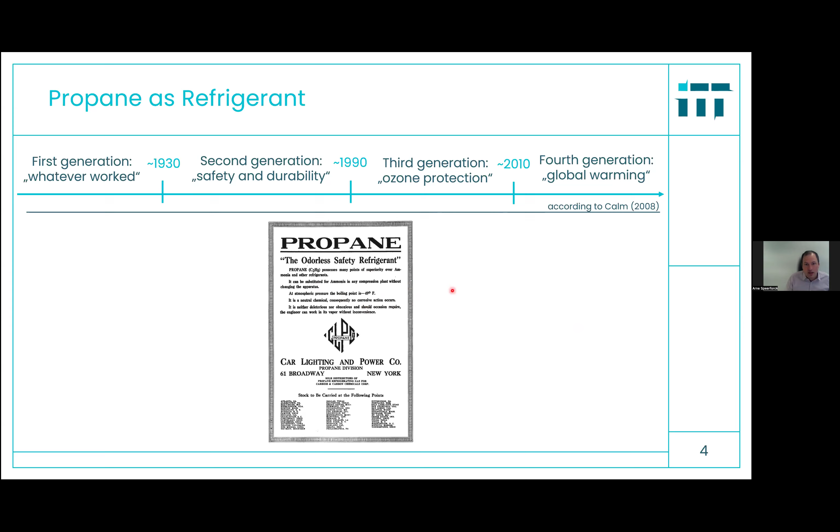If you have a look at propane as a refrigerant, it's very simple to explain that it is basically a very promising refrigerant from its thermodynamics. What you see here is the saturation vapor pressure of different refrigerants, mainly compared to R410A, which was the standard refrigerant. You can see that R290, which is propane, has a comparatively flat curve. This means you can have a comparatively high temperature lift with a comparatively low pressure lift, which is beneficial.

Another point about propane is that it has a comparatively high latent heat of vaporization. These quantities are all evaluated at saturation pressure of 13 bar for the different substances. You see it has a high latent heat of vaporization, and as you know from the Clapeyron equation, a flat curve here means a low dP/dT, and correspondingly a high enthalpy, or heat, of vaporization.

So you need to pay somewhere, and you pay with a comparatively low vapor density, which makes propane equipment a little more costly, because this is the vapor you need to compress. If the density is low, you need larger displacement volumes, so larger equipment. But you can see very quickly that propane is basically a very suitable refrigerant.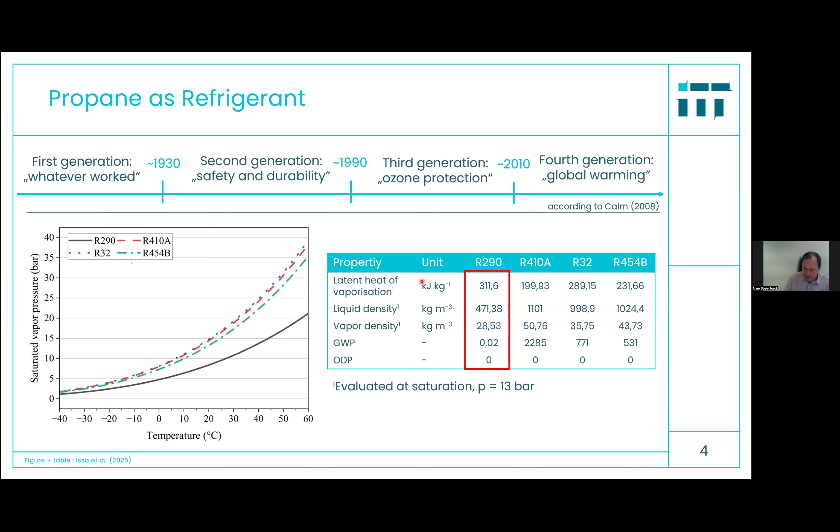Now, if we look at research, this is a chart from a review published recently by the group of Eckhard Groll from Purdue. They analyzed different scientific review papers on hydrocarbons as refrigerants, and you can see there have been quite a number of review papers published in recent years, clustered as follows.

People look at flow boiling, flow patterns, and heat transfer — these are mainly the upper three papers here. There's still, I think, a need to look at heat transfer characteristics, especially for mixtures. There isn't a large database, mainly due to safety requirements for the labs, I believe, but also for flow patterns of mixtures, or refrigerant-oil mixtures.

In the second area, people looked more generally at hydrocarbons as refrigerants, covering all different kinds of aspects — I'll come to that in a second. The standards associated with this also play an important role, because you now have different requirements for safety and flammability considerations.

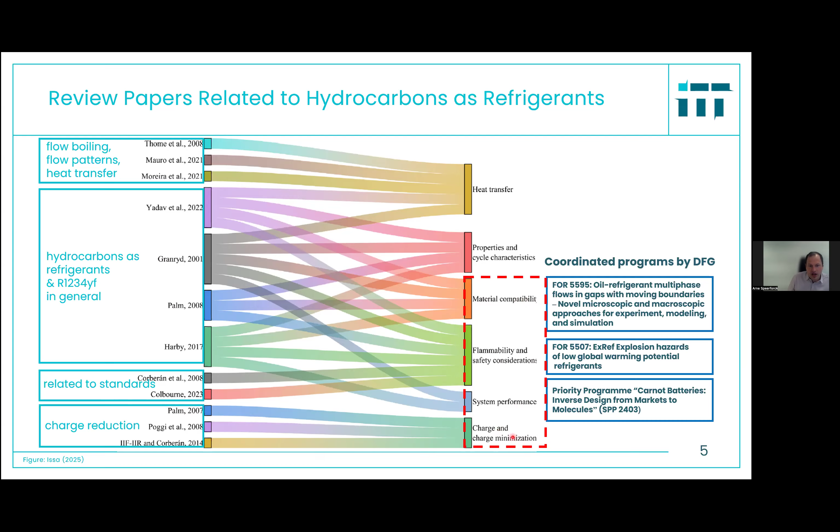The problem with charge minimization is directly associated to safety concerns. If we have toxic or flammable refrigerants, we want to have a low charge in it.

These are results from a recently published review where people looked at the refrigerant mass distribution in the components. You have a compressor, a condenser, and an evaporator, and here's a liquid line - this is a ductless split system. It's basically something you all know: one outside unit, one indoor unit. Almost all hotel rooms have these kinds of units.

You can see there's usually a large fraction of the refrigerant in the condenser because of the liquid part of the condensed refrigerant in it. The same is true for liquid-to-liquid heat pumps, but here you can have a little bit smaller volume, so refrigerant charge here is usually a little less.

Here too, the heat exchangers play an important role, but also the compressor. In the compressor, there's also a part of solubility of the refrigerant in the oil - also an interesting point to look at. But this is the general charge distribution, and it's very tough to measure.

If you want to do experiments in this area - I was working in Maryland as a postdoc with Reinhard Radermacher for a while, and we were running tests on this. At that time, 4 students were in the lab, and what they did is basically at the same time close these quick closing valves by hand.

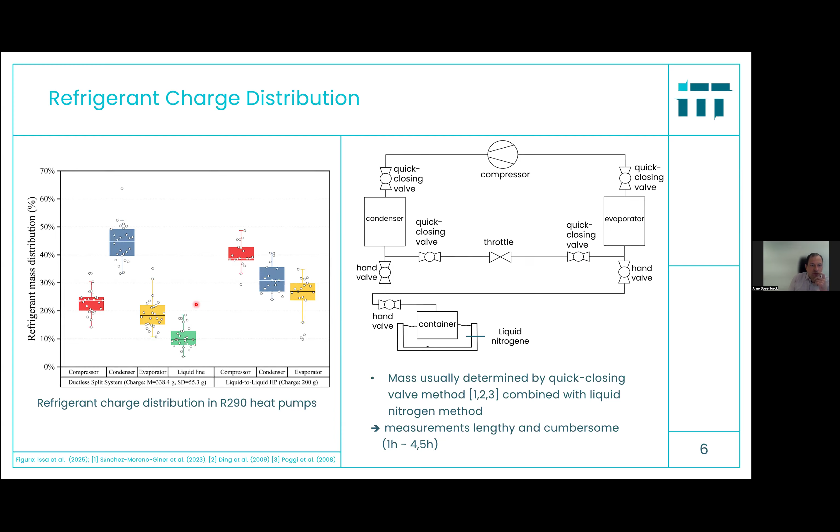There is one thing we are currently working on here - this is a test rig we built for charge reduction, but we want to do it via online measurement. Basically what we're building in the setup is a pumped cycle, so we don't use a compressor here, just a pumped cycle because we don't want any vibration. We have 2 Coriolis meters to have a broad range of mass flow.

Then we condition the propane to a certain level - here we could evaporate it, and then we have our test section, which right now is for condensation. We have 2 quick closing valves, and here we have some hose to connect it to the rest of the setup.

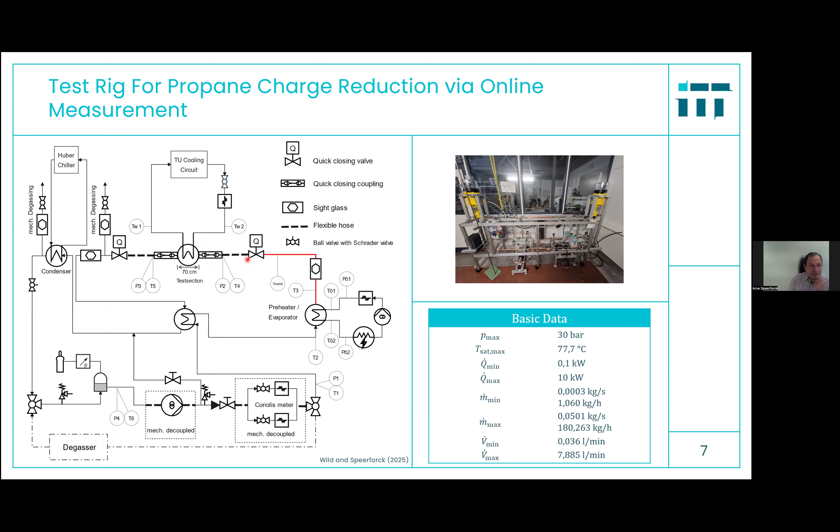Within this test section, we want to measure heat transfer, so condensation. But at the same time, we want to measure the mass of the refrigerant within the ductwork or pipework. So we built a test rig for that.

You can see it here - I took this photo yesterday myself. I feel I'm not a good photographer, but you can see we connected this test section. It's connected to 2 hoses, and then we have it here on a scale with a counterweight.

Then you can basically measure here the weight of the refrigerant flowing through that. It took us quite a while to make that work because it's kind of cumbersome to have it disconnected enough that you can measure these small amounts of propane in it.

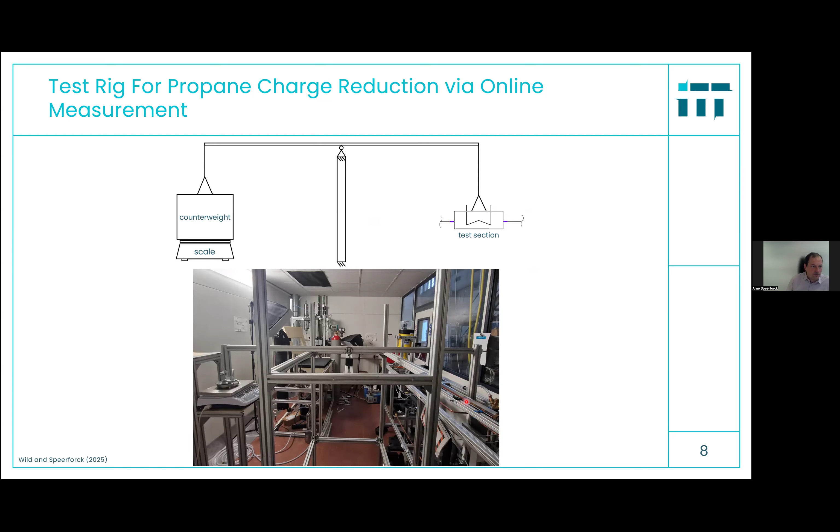Here is one preliminary result I want to show. You can see here that we varied the pressure - at this high pressure, propane should be liquid, single phase, and at low pressure it should be 2 phase. You can see here what kind of mass we measured in this pipe.

You can really see that we were able to measure online the mass of propane, because here it's a higher mass, which should be the case if it's a liquid in one phase. And you can see that it's reproducible, so we were measuring constantly the same mass at this higher pressure. At this lower pressure level in blue, the mass was reduced—it was then two phase, and this is also reproducible. So this is very promising.

We validated this by closing the quick valves, dismounting the condenser, and comparing it. Online we measured 27.41 grams, and offline we measured 27 grams. So we had a very small deviation of 1.5%, and are now happy to contribute by delivering more advanced geometries for charge reduction, which is now our current work.

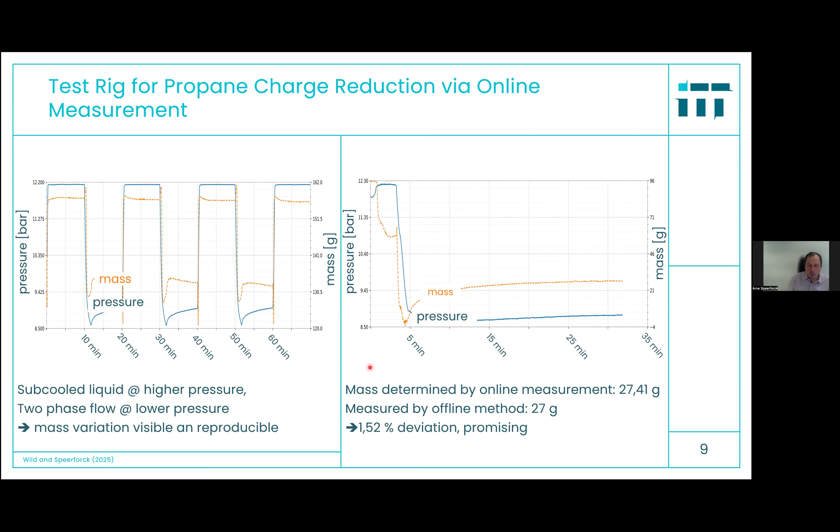Another example I want to provide, because this is more about looking at more complex structures, but it can also be way simpler than that. And as I am also from industry, I want to highlight one point here.

This is an example for mobile heat pumps. We basically work together with a large car company. This company approached us and said, okay, we use this refrigerant, R1234yf. There, charge reduction is a large topic because when it burns it can also become toxic, so you don't want a lot of charge in it.

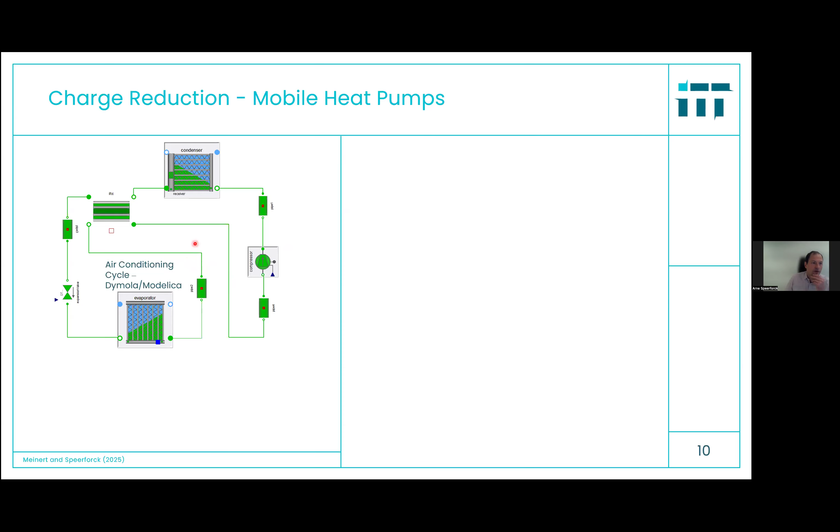They approached us and said, we model our whole cycle, but we cannot really make the model work—it does not fit our experiments. The first thing they showed us was their experiments: a very simple 1D analytical simulation and also a CFD simulation of the pressure drop through this cycle. And they said, we cannot really make this work.

This liquid line has a specific form. We noticed the measured experimental values were way higher than the ones simulated. So we looked at it and investigated, did some closer work, and finally found out it was just the way they manufacture those liquid lines and connect them.

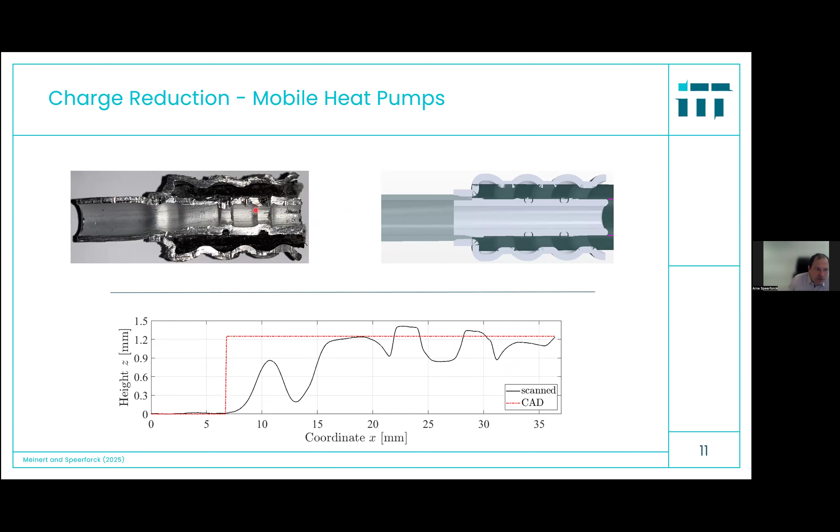By this, we proceeded and did a very simple model to calculate the pressure drop through that. We found that 85% of the pressure drop in this car cycle was caused just by these transition pieces.

This is a large amount, which means you can just reduce the diameter of this liquid line, which contains a lot of charge, and reduce the charge in this case by roughly 44%. This makes everything way safer and better. It looks very simple, but in practice it's very important to consider these liquid lines and the rest of the geometries.

If you look at these charts, we did the CFD calculation and calculated the pressure loss value of this transition piece. With very simple one-dimensional models, we met the experiment quite well, while these are still the uncalibrated CFD data. So this works quite well, and you can really achieve a huge amount of charge reduction here.

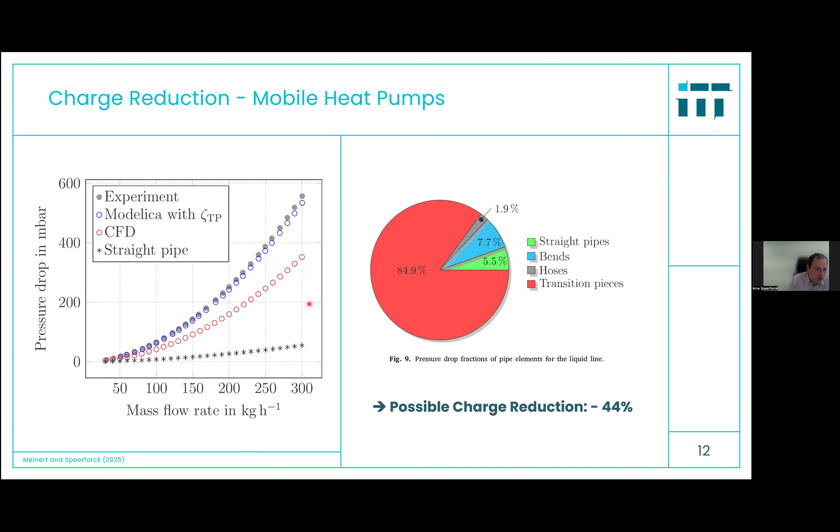Let me come to another point, which is also always important connected to charge reduction.

I also pointed to this research unit organized by Markus Richter, which looks into refrigerant and oil mixture properties. This is from the PhD of Marco Möhrle, who recently graduated from the University of Rostock. He looked at the heat transfer characteristics of oil and refrigerant mixtures. This is also important because if you use hydrocarbons, the oil used for the compressor will also circulate through the whole circuit.

You can use much smaller diameters if you don't have any oil, so you can use microchannel heat exchangers or similar. But oil requires a bit larger diameters.

If you look at the heat transfer impact of oil, you find that oil has a large impact when you have high performance surfaces. This shows for different saturation pressures the impact on this factor, which covers the whole heat conduction problem from refrigerant to secondary fluid. You can see it decreases from 1 by roughly 20% if you have a bit more than 4% oil in there, which really limits your heat transfer.

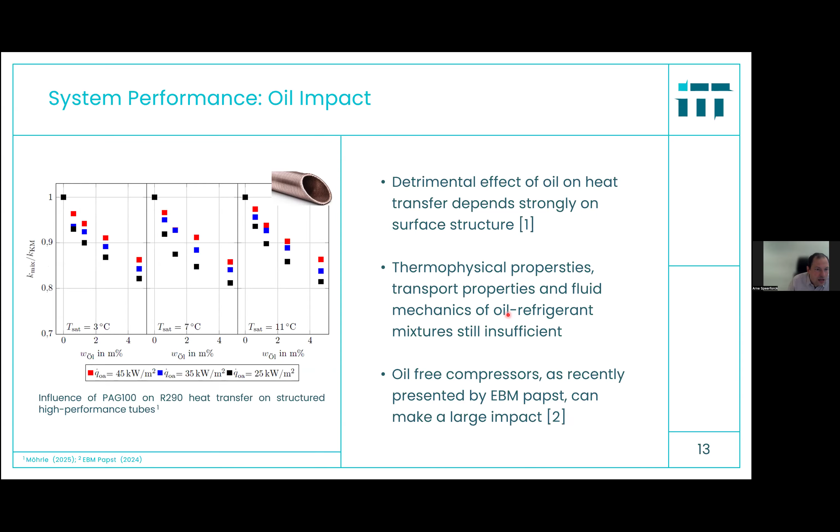There's another slide I want to show, which I think is usually interesting for a broader audience. It shows where our current appliances are standing at the sheer level of the technology. This is evaluated from manufacturer sheets, for 4 different manufacturers which are not disclosed here, for a temperature level between 7 degrees C air temperature and 35 degrees C water temperature. What we highlight here is basically the COP, the real COP related to the Carnot efficiency, because this is like a limit for where this technology might be standing right now.

We always consider 5 Kelvin to drive the heat transfer between evaporator and secondary fluid, and also condenser and secondary fluid. You can see that you achieve values here between 0.5 and 0.6, so there's still room for improvement, but they are already approaching a higher level. When I talk to students, I always tell them to calculate with an efficiency factor of 0.55, and then you can quite accurately predict the behavior of today's heat pumps.

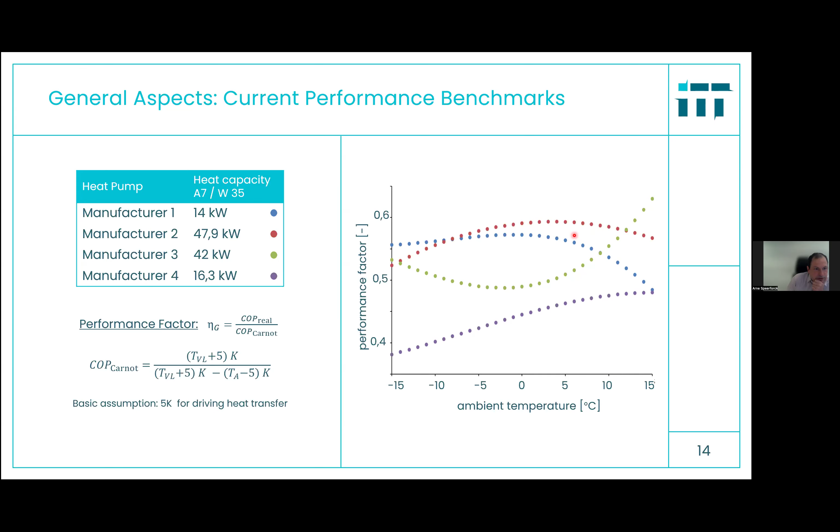Another point I want to make is to highlight a problem I still see. I've been working on heat pumps basically my whole professional career, but I want to show that I believe we still have an issue. If you look at the simple provision of heat pumps, an issue we could have is that if we supply basically all the amount of energy, and especially power, required for heating and hot water by heat pumps, then it will cause pretty high electric loads.

We developed a library here for sector-coupled energy systems. It's transient, for Modelica, and you can see that here. What we did is assume a simple ambient temperature here, for a period from January to February with data from 2018, because that's when we have all data available.

Here the ambient temperature is highlighted in black, and the COP of a heat pump, conservatively assumed, is highlighted in gray. You can see that the COP is lowest on the coldest days outside. If you were to cover all the energy required for household heating and hot water in Germany, you would reach a peak demand of 90 gigawatts.

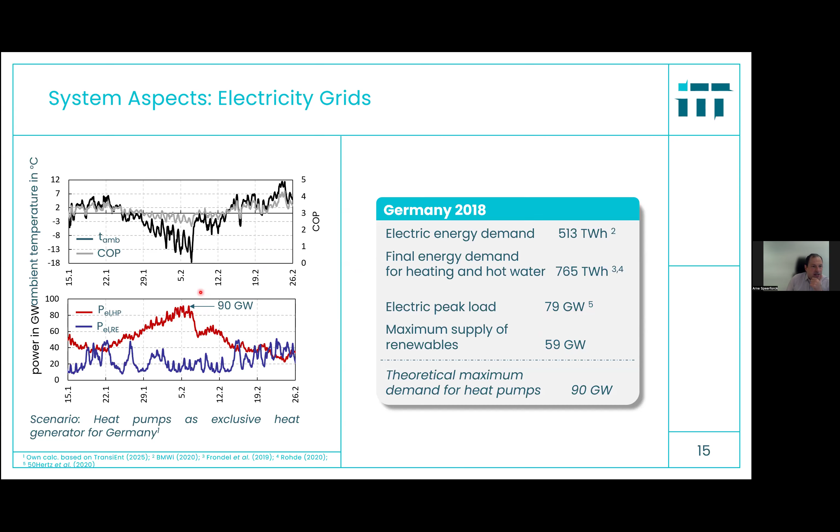So this is the last point I actually want to mention. And yeah, thank you very much for that. For me, that would be it for this talk.

Thank you, thanks Arne. That was also another very important view on heat pumps, and thanks very much for this insight and for sharing your view. My question, or what came into my mind when I was listening to the other two talks and now listening to your talk, what's your view?

What's your opinion on this? In the last slide you showed a gap between the electricity we have and what would theoretically be used for heat pumps. But as Aya and Andre showed, there might be mixtures or reactive working pairs that could increase the COP. Is the industry open for this?

I think they are open for that. For me, one practical limit at the household appliance level is that, as Andre also showed, the temperature lifts are maybe more moderate. That's one point. The other two points are: first, if you have a leakage in the field, what do you refill? If you have a mixture, it's not so easy to refill the right component. And second, frosting is also an issue for most air source heat pumps. If you have a zeotropic mixture, you'll get very different frosting behavior of the evaporator, which again requires engineering. So I think this makes people a bit reluctant.